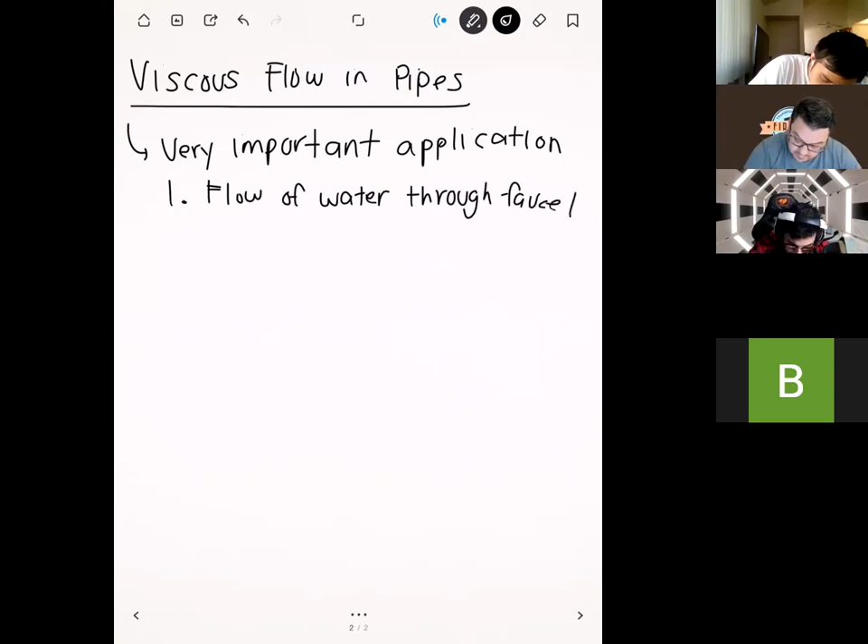That's where pipes are going to be. HVAC, so your heating and air conditioning and ventilation, they all use pipes, but that's for air, not water. If you work with, like I think at the beginning of the class we talked about, the Alaskan oil pipeline, so big pipelines like that, those are big pipes too.

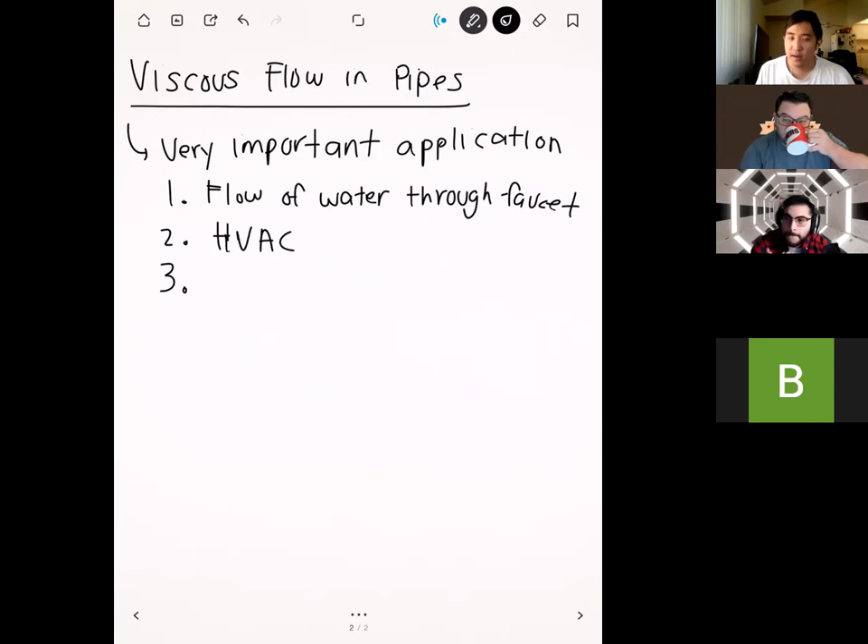There's even biological examples, like just flow in your body. Your blood vessel is basically like a pipe, right? And a lot of these materials can be applied to that as well. And other things, like your motor oil in your engine, those travel through pipes, and many more. So the examples of pipe flows in engineering are very numerous and way too many to list in a class like this.

HVAC stands for heating, ventilation, and air conditioning. So basically, the airflow in buildings.

In this unit, we're basically going to be combining two things. We're going to combine what I call analytical methods, which are solving equations for certain quantities based on first principles — we'll see Bernoulli come back. Bernoulli is probably the MVP of this fluids class, so we use him quite a lot, and this is no exception. And we're also going to make use of empirical data, so this is going to involve dimensional analysis as well. So it's combining those two things, and we'll see how they combine to help us analyze these problems.

Question: do we consider air as a viscous fluid? Yeah, actually we do. Air has very low viscosity, but with pipe flow, the diameters of these pipes are very small relative to things like airflow over an airplane, which is a vast open space — there viscosity plays very little effect. But in very small confined spaces, like inside a pipe, even the smallest viscosity is still going to have an effect, just because the spaces are so confined. So in this case, we do consider air as a viscous fluid. Great question.

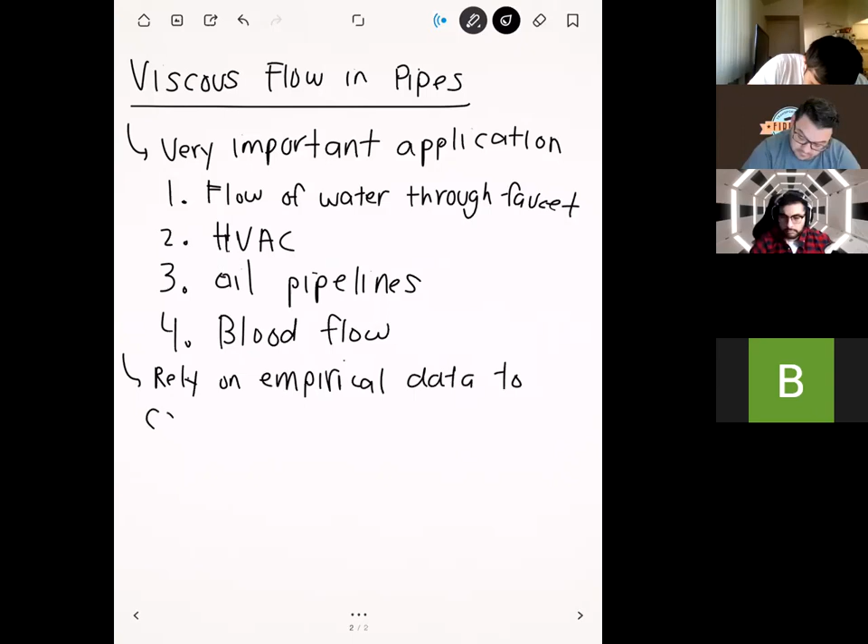We're talking in detail this week about turbulence, which is an important phenomenon in all of fluid mechanics, but it plays a really big role in pipe flow as well.

Just to give you a preview of where we're going, we're going to be looking at systems that look like this. Let's say we have an inlet pipe. Let's say we have an elbow here to change the direction. We have another pipe here. Let's say we have a pump, and that pump is going to add energy. Let's say we have another kind of housing here, and another thing that's going to split the flow — so we have a T intersection. And we have a curved X section of pipe. And let's say we have a valve.

I'll define all these things later as we get to them, but just to give you a preview of where we're going — this might be a simple system. So here you have straight sections of pipe, here you have an elbow, this is a pump, this is a T-split, and then this is a valve, okay?

We'll be looking at specific piping configurations like this and seeing how they affect the flow, and how we can actually do calculations with these. Are there any questions on this before we move on?

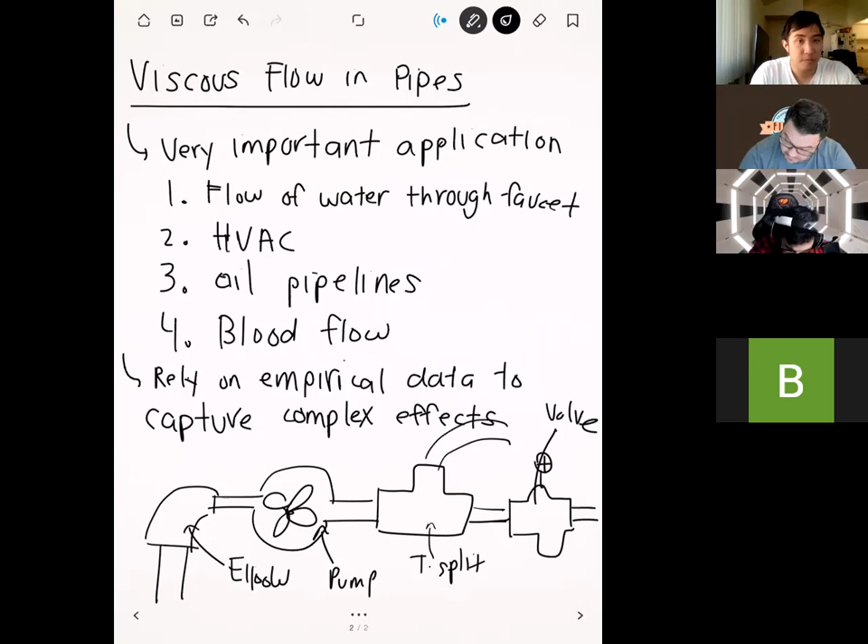Okay, so the first thing we're going to talk about is the difference between laminar and turbulent flow. Everyone's probably heard the term turbulence before. If you've ridden in an airplane, you're familiar with turbulent flow - it's like a theme park ride, the plane starts to shake. What that refers to is that the air currents around the airplane are really chaotic, and they kind of buffet the airplane and make it rock. Turbulence isn't just unique to airflow.

We can use turbulence to describe general fluid flows and how they behave. These terms, laminar and turbulence, really describe how orderly, or how well behaved, the fluid moves. Generally what we see is that as the velocity of the fluid increases, the flow patterns become more chaotic.

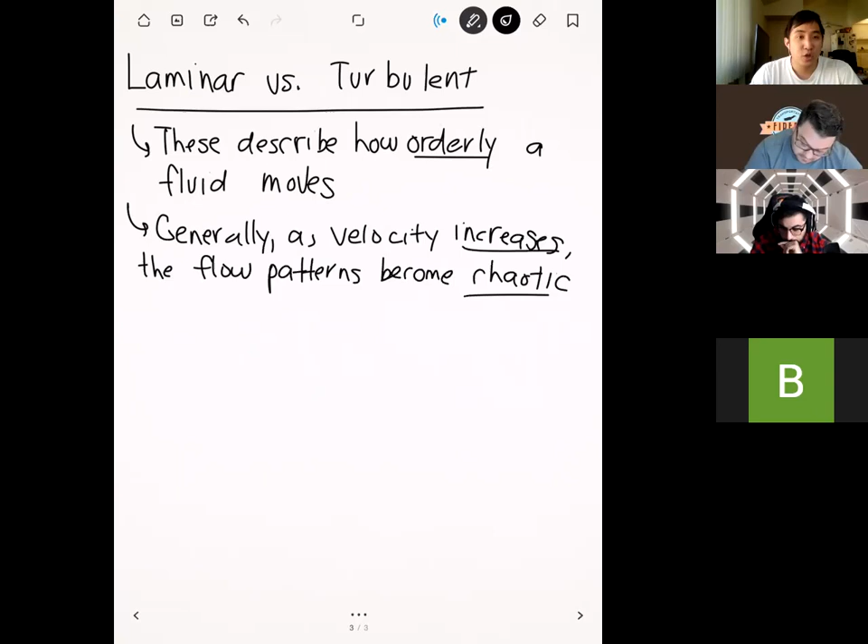So I don't talk about history all that much because I don't think it's that important in the grand scheme of things, but this is an important one. This idea of turbulence was first observed by a guy named Osborne Reynolds. You've heard Reynolds before - his name is attached to a lot of things in fluid mechanics, because he did a lot. The experiment that he did was that he had a pipe.

In the middle of the pipe, he had a little injector, and from this injector he was releasing some food coloring or dye.

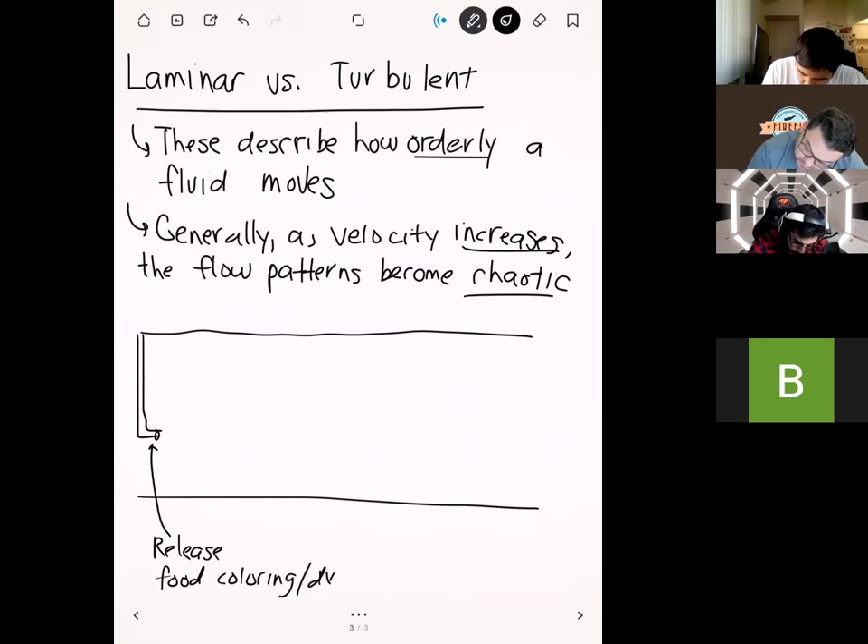In this pipe, we have flow that goes in this direction, so the flow is basically carrying that dye downstream. He observed that depending on how quickly he moved the flow, or how fast the flow was, he observed different patterns for the dye.

Let's go over the case for low velocity first - I'll have low velocity in red. When he used low velocity, what he found was that the dye kind of stayed in just a single line, just like that.

At low velocities, the dye didn't really go out and explore all that much. It basically just stayed within the same line as which it came out from the injector. If you look at pictures from the experiment, you had a very nice orderly line - it was bold because the dye was all concentrated into that single line.

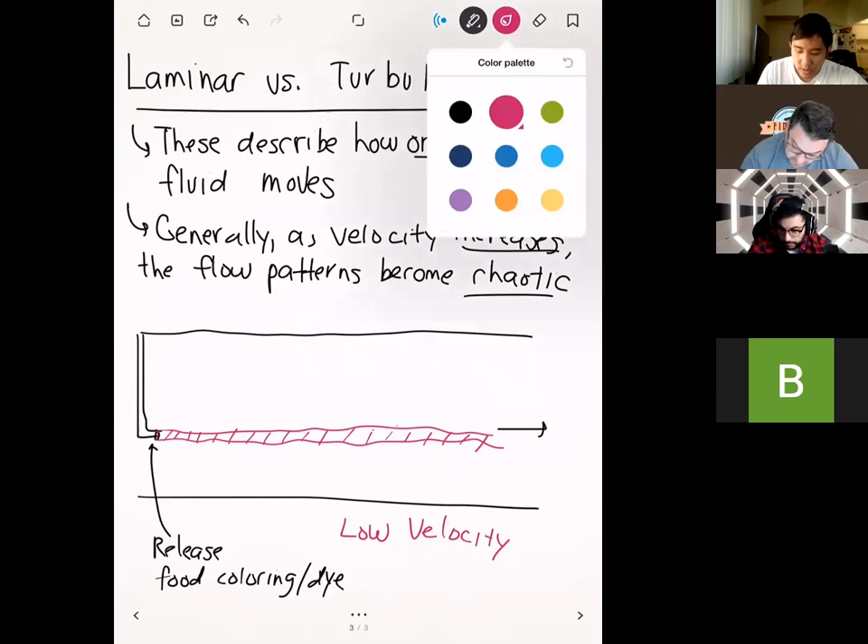But then as he ran his experiment and increased his velocity, let's say now he's under medium velocity - what he expected was that he would still see this dye streak, but it would just move faster down the pipe. But he noticed something he didn't really expect. As he increased the velocity, not only did the dye streak move faster down the pipe, it also started to spread out to the other areas of the pipe too.

So it started to look like this. Compared to the original dye streak, this one was spread out throughout the pipe - it was no longer just staying in this very narrow column, it was starting to spread out to the confines of the whole pipe.

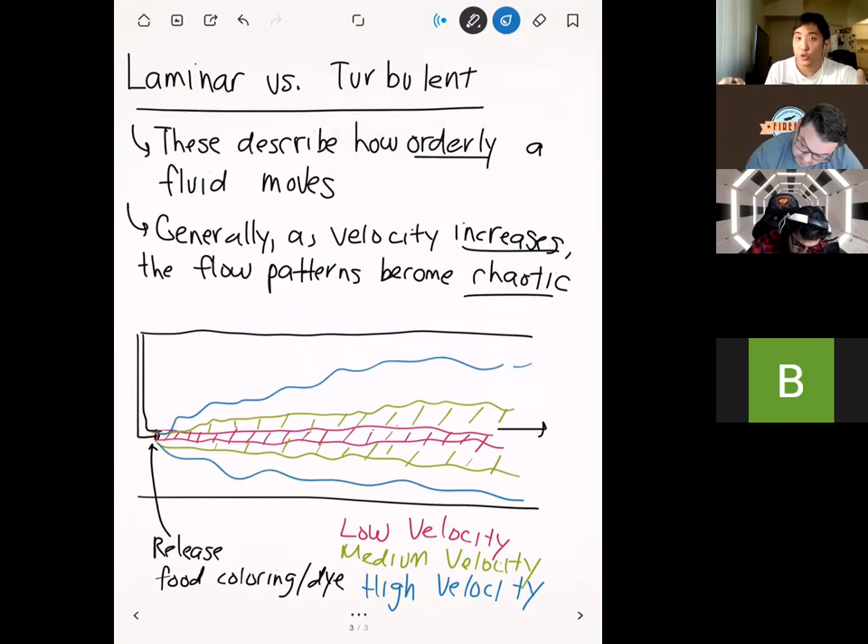And then as he increased this velocity even more - let's say he increased it to something that's high - this spreading got even more pronounced. So then we got something that looks like this, where the dye started to diffuse across the entire pipe.

This was very strange to him because the flow that he was putting in was only one direction - he was just putting flow from the left side to the right, and the flow field should look perfectly horizontal. So if that's the case, why was he getting this kind of spreading? The spreading was due to this phenomenon that he just observed, known as turbulence, okay?

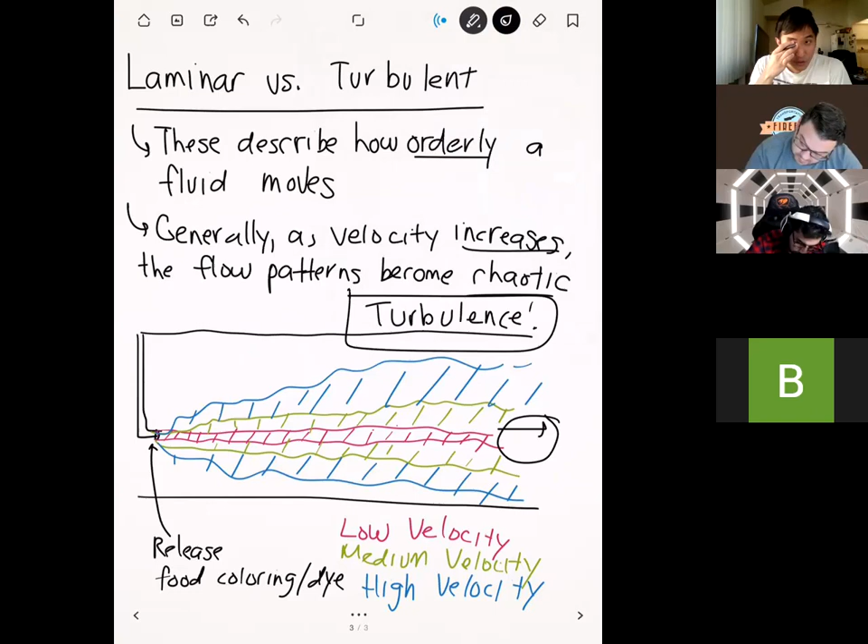All right, I'll draw another picture to illustrate turbulence on the next page. But before we do that, are there any questions on this?

Okay. Right, so from this experiment, he was able to come up with two different ways to describe a fluid motion.

So let me draw two pipes here. In the first case, which we called laminar, the flow patterns are very orderly. They stick to a very orderly pattern.

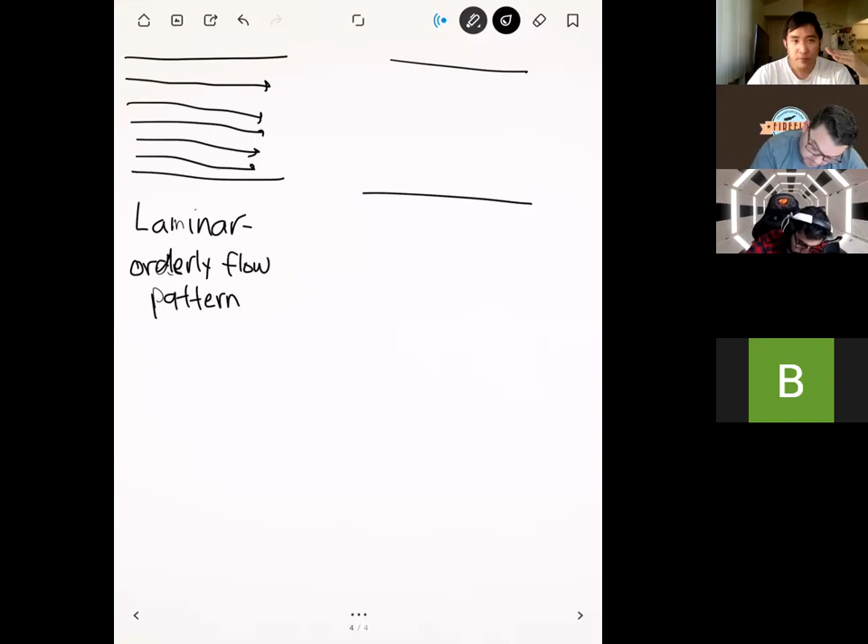As an example of this, let's say we draw the streamlines and they look just like this. They all kind of follow the same path, and they're just like nice little soldiers in a row, okay?

On the other hand, as he increased the velocity, what he started to notice was turbulence. And turbulence, for lack of a better term—to be real with you guys right now, we still don't really understand turbulence all that much, despite many years of research. We characterize turbulence as just kind of chaotic flow.

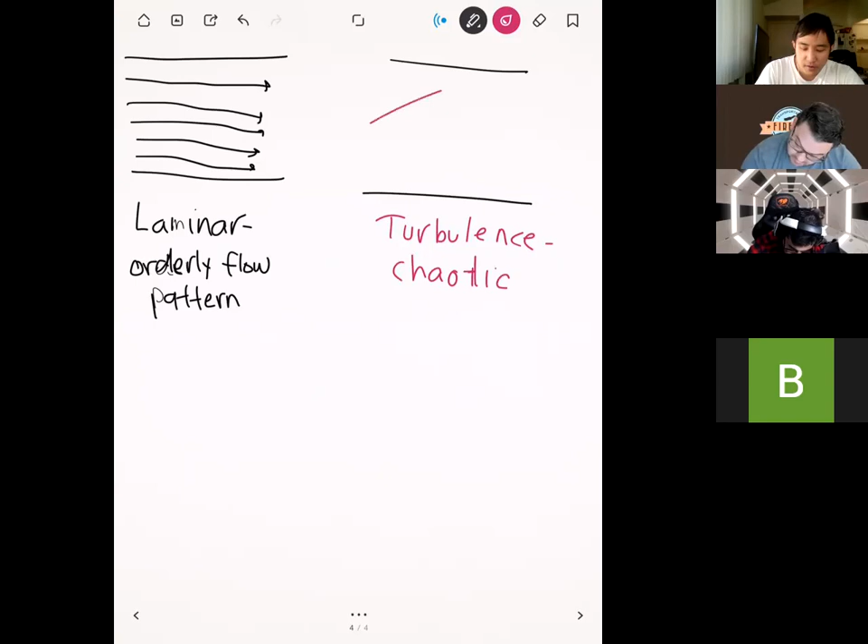So the flow, instead of having nice orderly streamlines like we have on the left, literally just looks like your 3-year-old cousin started scribbling onto the paper, right? And that's not that much of an exaggeration. So chaotic turbulent flow is really chaotic like that.

You can see here that we have flow streamlines that not just go in a straight line, but travel to other parts of the pipe, which is how he was able to observe the spreading of the dye column. Yeah, chicken scratch, like your doctor's signature.

Okay, so now the question is, how do we determine if we have laminar or turbulent flow? Yes, we can kind of look at the flow like this, but what Reynolds wanted to do was, without having to run a fancy experiment like he ran, find a way to determine whether a flow was laminar or turbulent.

And so he was able to come up with a way, and we actually saw this last week. The way that he determined whether a flow is laminar or turbulent was he came up with this number, which he named after himself, called the Reynolds number.

So let me define all the quantities here. This rho right here is density. This V is velocity. D, in this case—we'll see Reynolds number come up in other applications—D can be any length, so we often call D the characteristic length of the flow. It's just any kind of length scale that characterizes it. But for this experiment, D is going to be the diameter of the pipe.

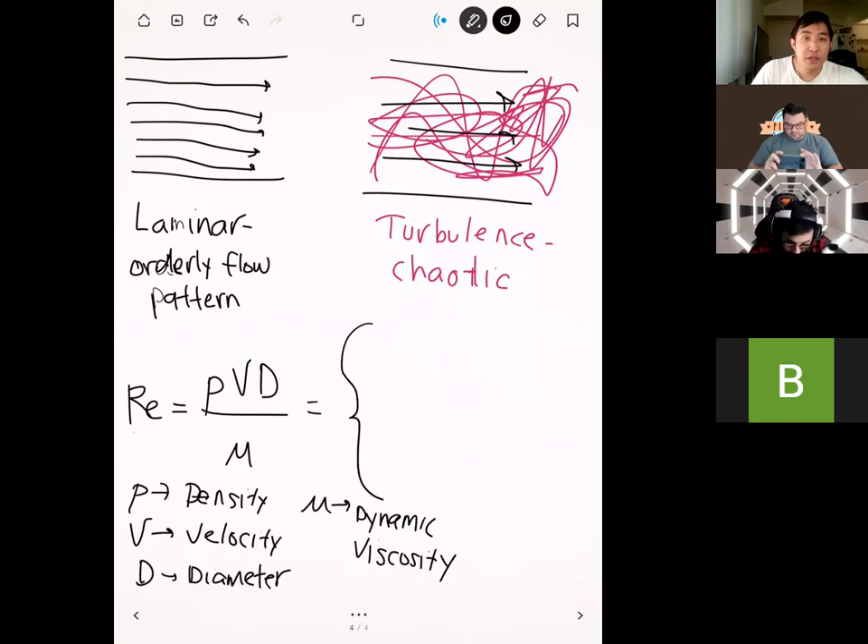Okay, and so what Reynolds found was that if you compute this Reynolds number, and your Reynolds number was less than 2100, then this gives you laminar flow.

If you compute your Reynolds number and it's above 4000, this gives you turbulent flow. If you're in between, this is known as transitional flow. Transitional flow is like medium chaos, I guess you can say. It's not as chaotic as turbulence, but more chaotic than laminar. There's a more precise definition, but it's hard to get into without diving into turbulence, which I don't want to do, because it's a rabbit hole that goes really deep.

So is it that 2100 is less than Re is less than 4000? Yeah, so if the Reynolds number is between 2100 and 4000. Remember what the Reynolds number represents.

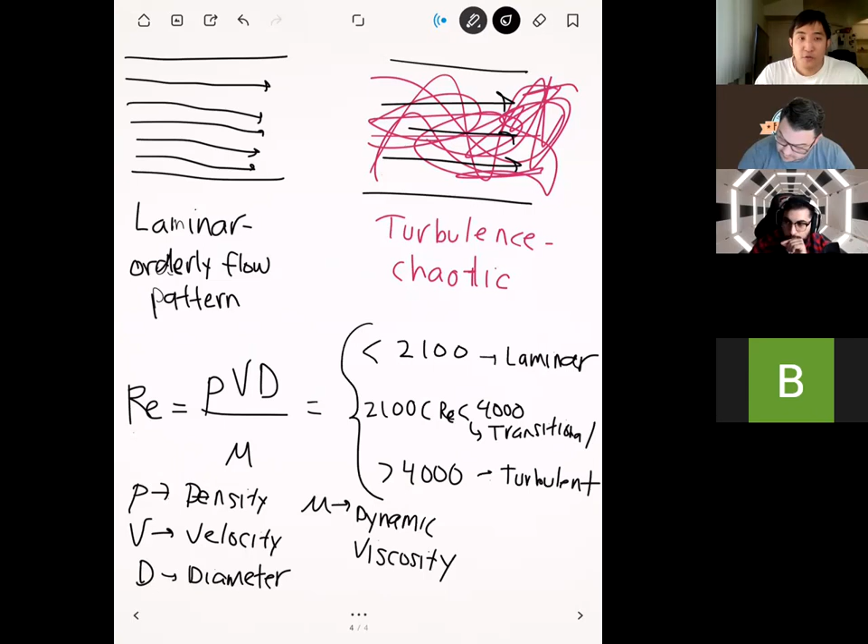The Reynolds number was one of our dimensionless numbers that we talked about last week, and it's a ratio of inertia on top and viscous forces on the bottom. So for a fluid flow, as the inertia forces start to dominate, as the velocity goes up, or say you have a heavier fluid, a higher density, or a higher length, as inertia starts to dominate, then you start to get more and more chaotic flow.

Generally the way Reynolds number goes up is the velocity goes up, because usually the density for a fluid is relatively fixed. So the only way you can change the inertia is by increasing the velocity. As the flow gets faster and faster, the Reynolds number gets higher and higher, and you get more and more turbulent.

One other note I want to make is that we'll see Reynolds number after the Thanksgiving break too, but under a different context. Depending on the context, these thresholds are going to be different depending on the situation. These thresholds of 2100 and 4000 are specific to just pipe flow, because that's the subject for this week. But when we go over boundary layers and external flow after Thanksgiving, these thresholds are going to be different.

So I want you guys to keep that in mind. After Thanksgiving, when I say the Reynolds number has to be greater than 10 to the 5th to be turbulent, I want you to think it's because they're in different situations. These numbers were very much experimentally determined, so they're pretty arbitrary. The reason is because these were just measured from experiments, not really from first principles. Any questions on this?

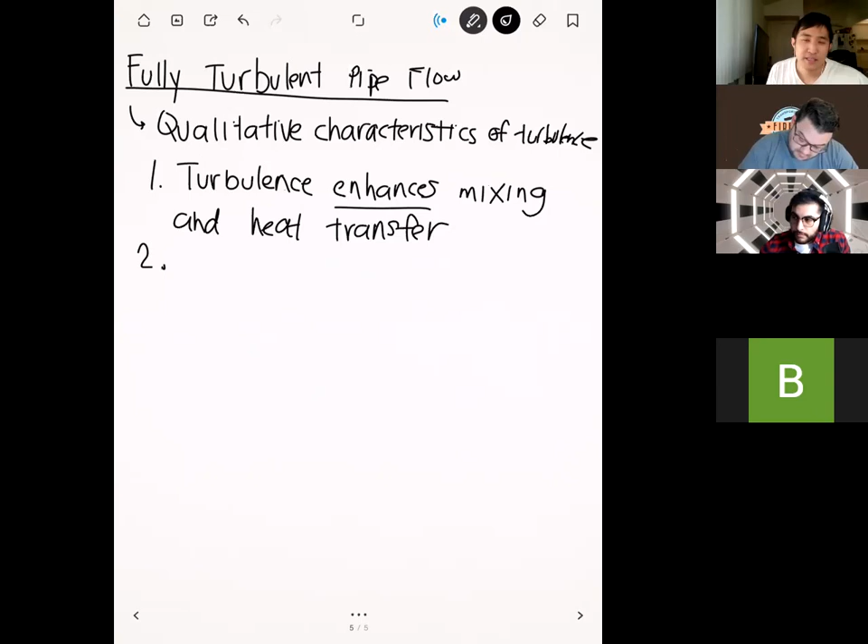The other thing turbulence helps with — or I guess this is a bad thing — is that turbulence will also increase the pressure drop along the pipe.

Relative to laminar flow. Remember, we talked about pressure drop as a way to characterize how much energy or force is needed to drive a flow. So if you have turbulent flow, it's generally going to be more inefficient in terms of energy — it takes more energy per fluid to drive turbulent flow.

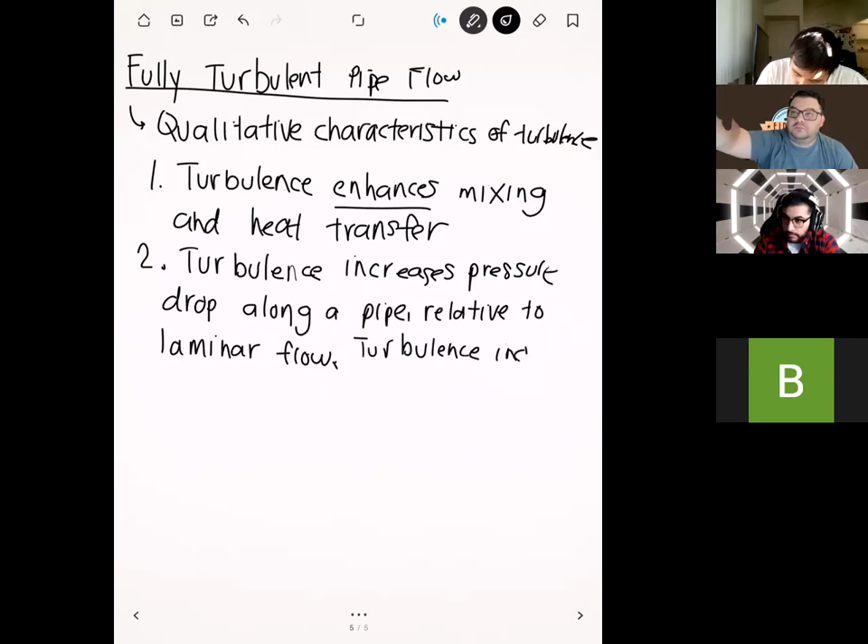Another thing to mention is that when you compare turbulent flow and laminar flow, turbulence increases the drag on a solid body. It increases a very specific kind of drag called friction drag, or viscous drag.

We'll talk about this more after Thanksgiving, but I wanted to mention it now. So turbulence, even though we don't fully understand it yet, we do know some of its effects on certain things, at least from an engineering point of view.

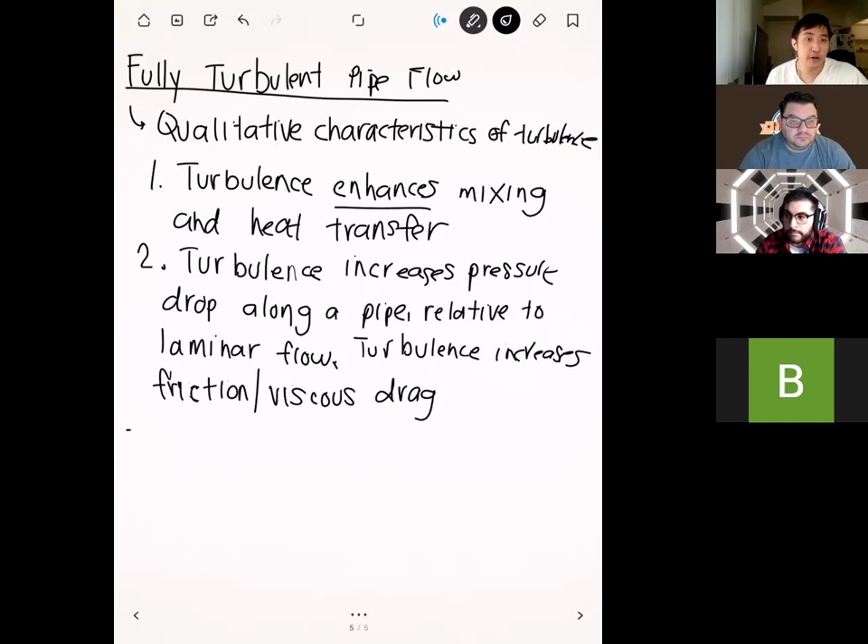With those in mind, we can start to use this in some kind of analysis. Before we begin, I want to bring back Bernoulli for probably the fourth time in this class, but it's really useful. I'm going to put Bernoulli in a different form — I don't think we cover this explicitly, although some of you have seen it in the notes, but it's going to be more useful for our calculations here. This is the Bernoulli equation in head form.

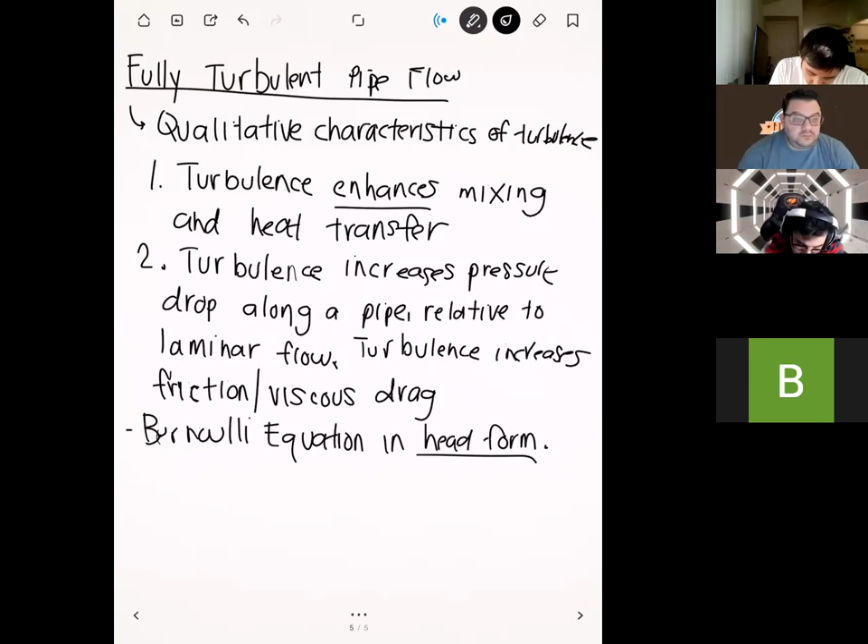What's unique about this form is that we've manipulated the equation so that every term here has units of energy per weight — basically every term will have units like joules per Newton, something like that.

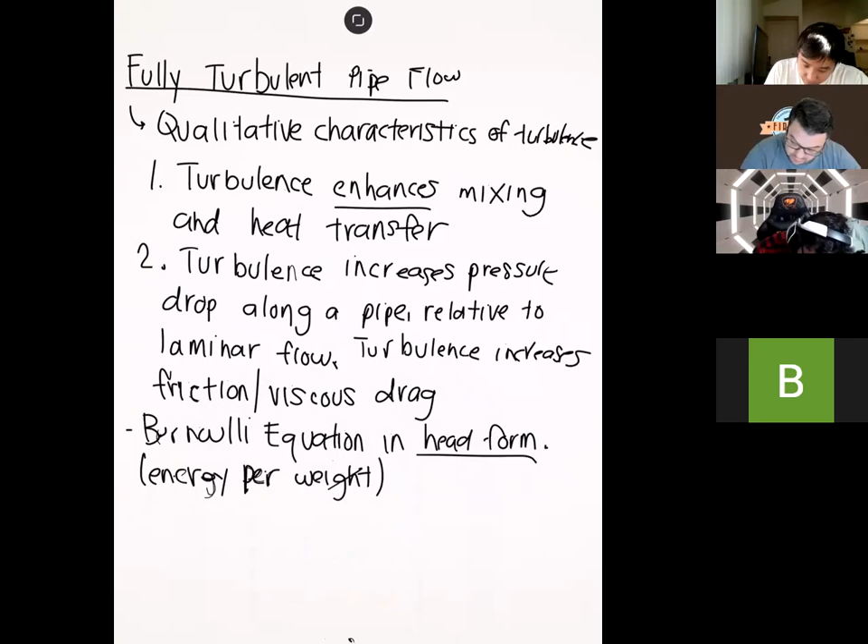So our Bernoulli equation looks something like this: P out over gamma, where gamma is specific weight, so that's density times gravity. To that we add V out squared over 2g, which is our kinetic energy term.

Next, we have our height term. That's just Z out. Of course, that has dimensions of length, but length also has the same dimensions as energy per weight. So they end up having the same dimensions, but they have kind of different interpretations.

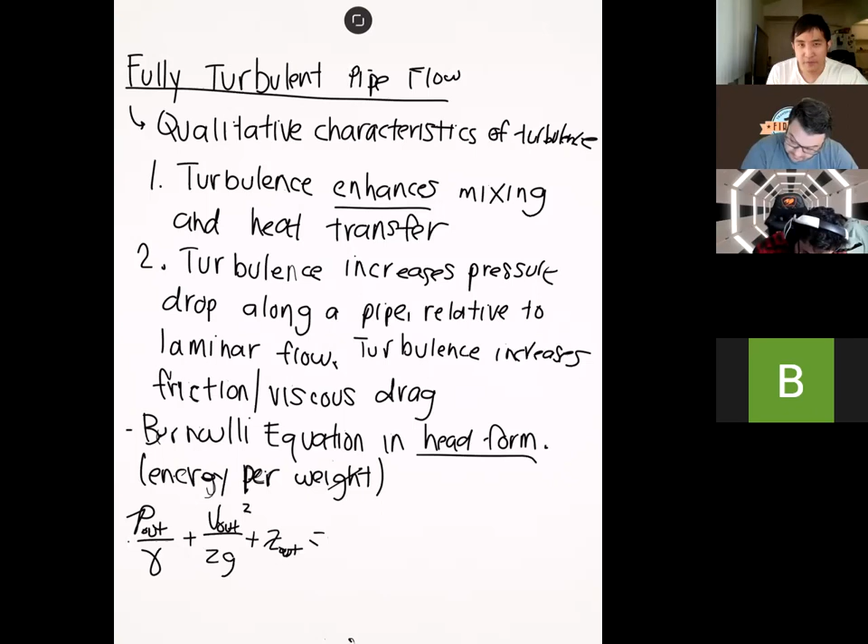This is going to be equal to the same quantities at the inlet. So you have P in, pressure in, divided by gamma, plus V in squared divided by 2g, plus Z in. Those are the standard Bernoulli terms.

But since we're talking about energy here, we have to also include terms for shaft work and also for losses. I'm going to give the shaft work the term H sub S, and then the losses, I'm going to give the term H sub L. So this right here is shaft work, and this right here is head losses.

Remember, shaft work is if you have a pump or a turbine in your flow, where you have a device specifically designed to either insert energy or take away energy from the flow. And then HL is your losses, energy losses due to dissipation or viscosity. The focus for this unit in pipe flow is actually going to be this guy right here and how we actually quantify this. Previously when we saw this for conservation of energy, I kind of just gave you the losses, but now we'll actually have ways to compute this using some experimental data that people have done in the past.

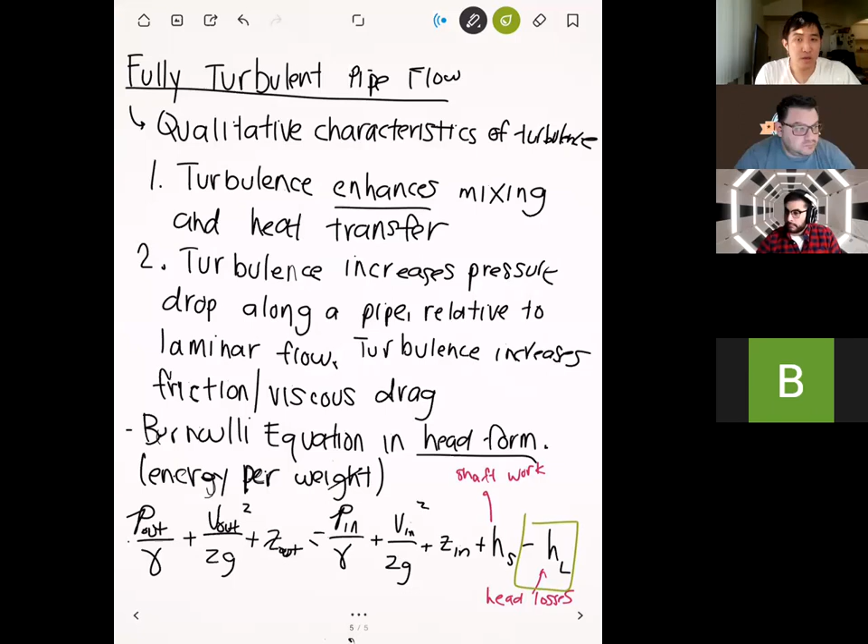Let's talk about these head losses a bit more. Remember, these head losses represent a viscous energy loss in pipe flow. As the fluid flows through the pipe, it's going to be rubbing against the sides of the pipe, right? And so just like when you rub your hands together and you have heat loss from friction, as the fluid rubs against the sides of the pipe, it's going to incur some energy losses.

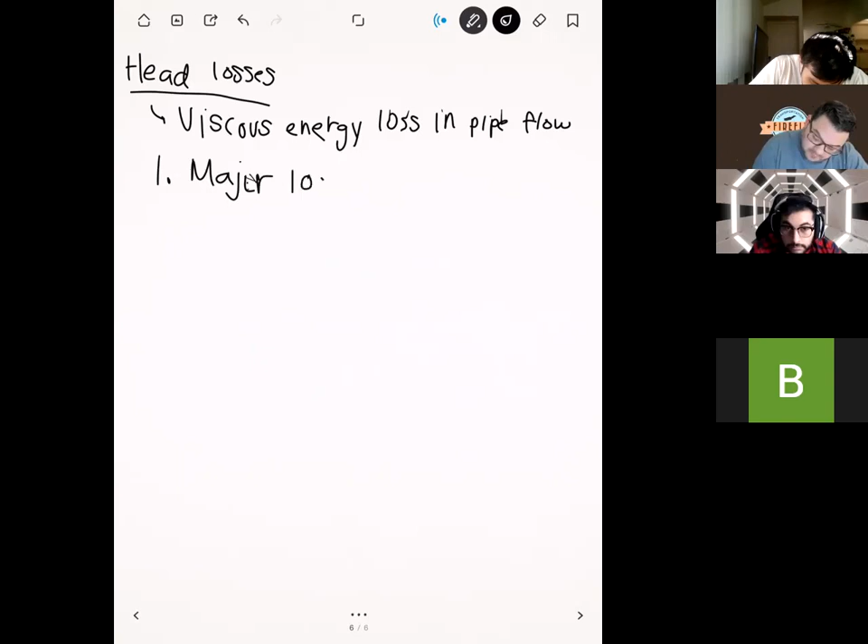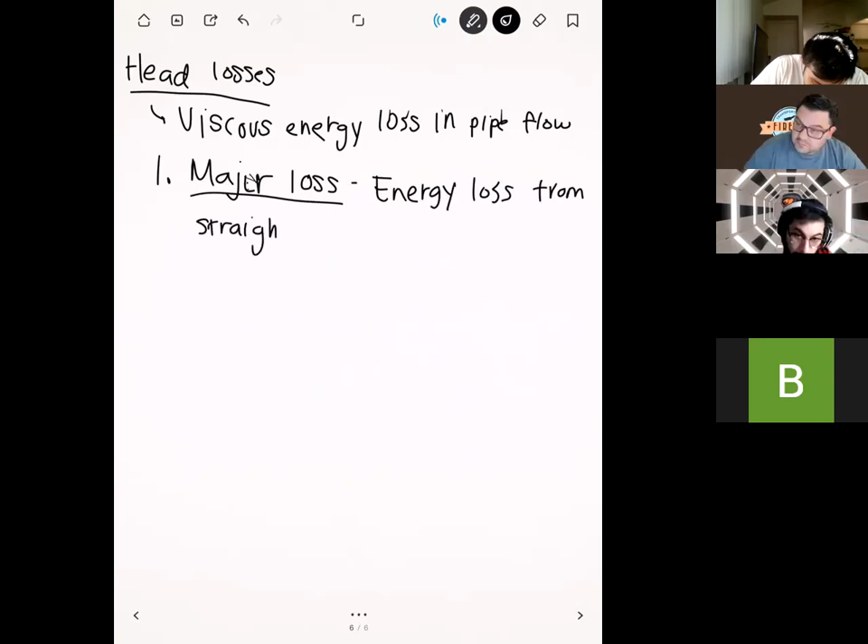There are two categories of losses that I want to talk about. The first one is called major losses. Major losses are defined as energy loss as the flow goes through straight segments of pipe. Just by going through a straight section of pipe, you're going to have some energy losses there.

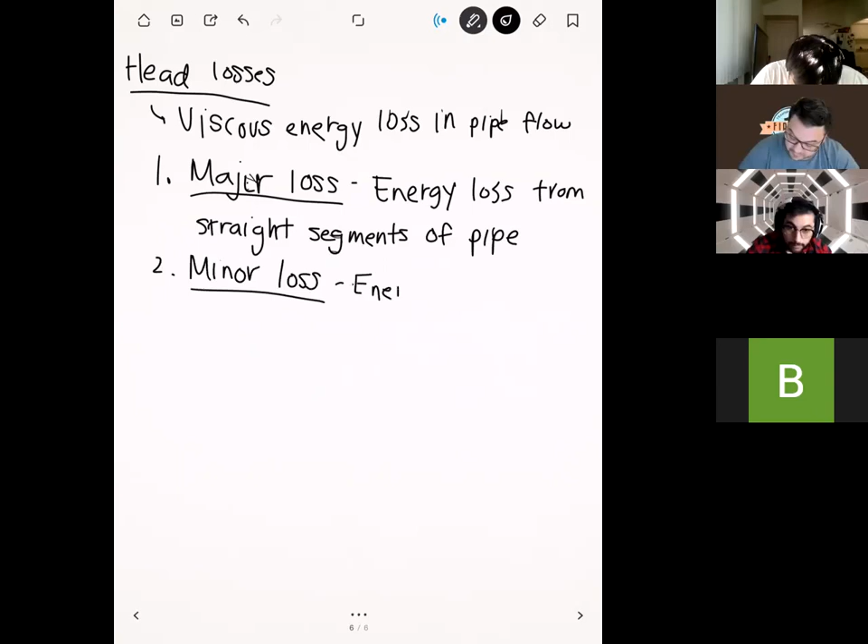The other thing we'll talk about is minor losses. Minor loss is any energy loss that goes through basically everything else. Remember from the figure at the beginning, we had things like bends, L bends, T intersections, valves, flow splitters, pumps, and stuff like that. So basically everything else will be characterized as minor losses.

Once you compute the major and the minor losses, the total head loss is just going to be the sum of these two.

What we're going to do next is learn how to actually compute these two kinds of losses. We'll cover major losses today, and if we have time, we'll go over minor losses later. One thing I want to talk about before we begin is that this naming convention is terrible—probably one of the worst in fluids—because when you think of major and minor, you think major losses are going to be bigger, right? That's not the case at all.

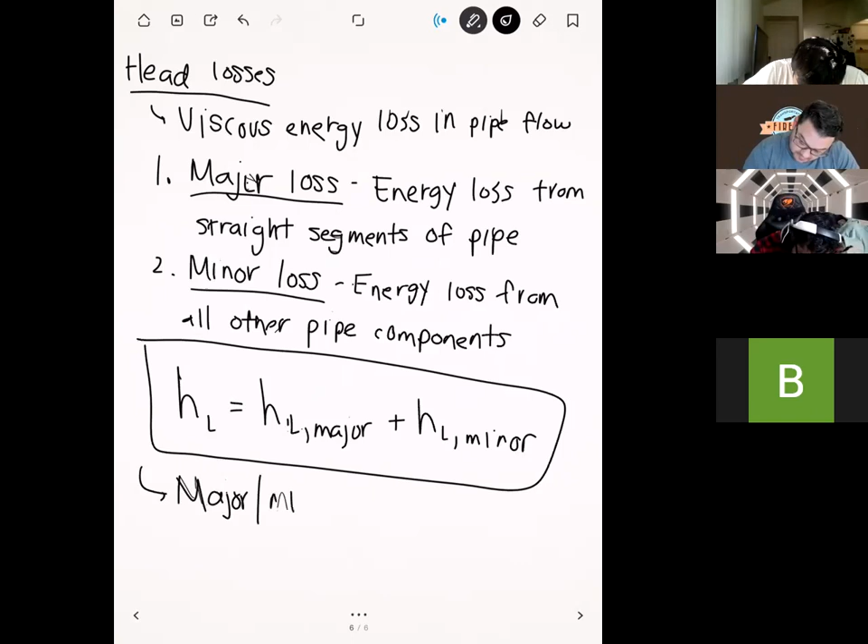The major and minor here have nothing to do with their relative magnitudes. We're going to see situations where your major loss is actually extremely small, but your minor losses are really big. This happens a lot in practice—even though we call them major losses, there's usually not that much energy loss there compared to the minor losses. So if you're doing homework problems and get a minor loss that's like 5 times higher than a major loss, don't panic, that's what it's like a lot of the time. It's even more terrible because it's not even named after the person who invented this—just that whoever named it was kind of a bonehead and chose the worst naming convention, one that's going to confuse fluid mechanics people for the rest of their lives.

Any questions on this before we start going into major losses?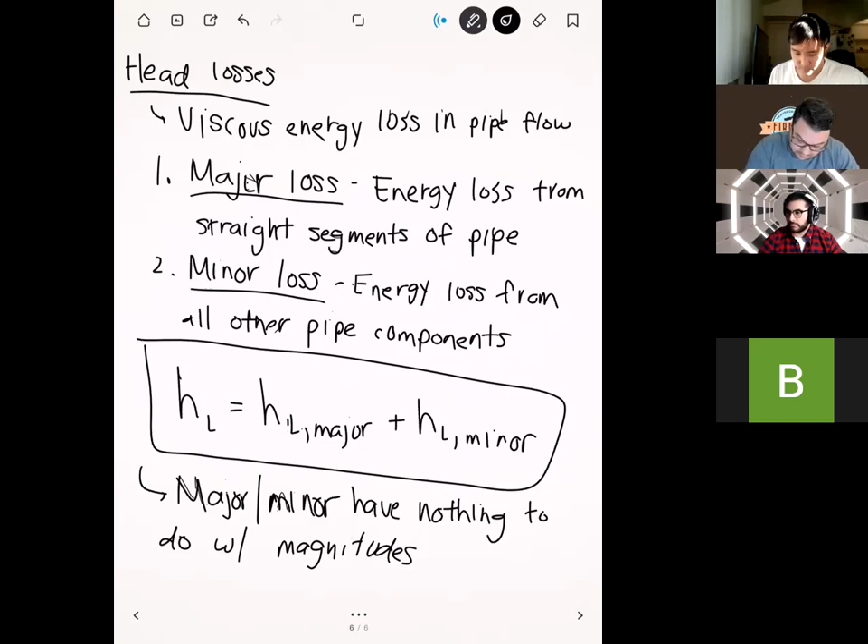Okay, let's talk major losses first. Just like was mentioned before, the major loss has to do with energy loss associated with straight segments of pipe. The way that we characterize this energy loss is as a pressure drop. Essentially, because of these major losses, we're going to have a drop in pressure as we flow through a pipe.

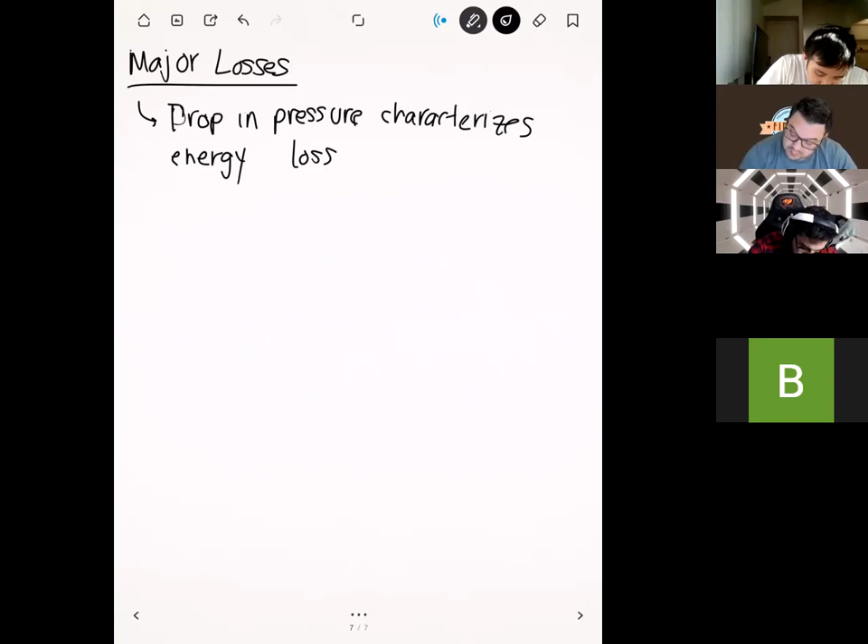Characterizing this pressure drop is actually pretty complicated, especially when you have turbulent flow. But we can come at this from a dimensional analysis standpoint. From dimensional analysis, what we found is that the pressure drop, or delta P, is equal to a function of the following parameters.

So it's a lot. We can say that the pressure drop is basically going to be a function of the velocity v, the diameter d of the pipe, the length of the pipe, so depending on how long your pipe is, and at the end here we have mu and rho, which are viscosity and density. And so we have a new guy joining the party: this represents the surface roughness.

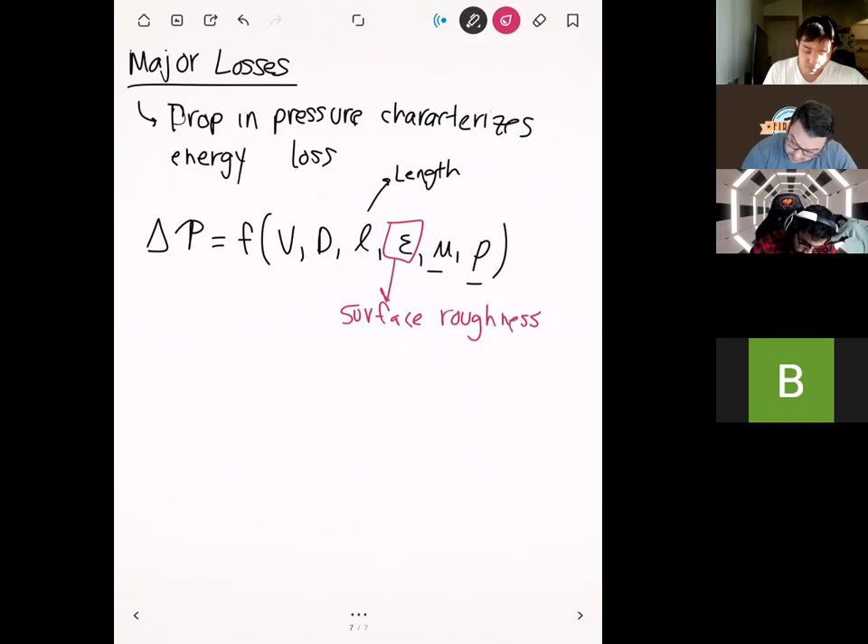What that represents is the fact that when you have flow in a pipe like this, the pipe is not going to be perfectly smooth. So you're going to have a little roughness on the surface. That's almost always going to be there, because it's almost impossible to eliminate this roughness. You have to use very precise machining methods to at least minimize this.

The way that this roughness is characterized is as the height of these kind of imperfections. So this epsilon here has units of length. In other words, it's the height of the roughness.

If you're curious about what typical surface roughness values are for a pipe, this is tabulated in table 8.1 in the book. In table 8.1, depending on what type of material your pipe is, they'll give you kind of typical values for these surface roughness. But again, this is something you can also look up on online databases, or a lot of times if you buy a pipe, it might be in the specs for that pipe as well. So this is an important thing to know.

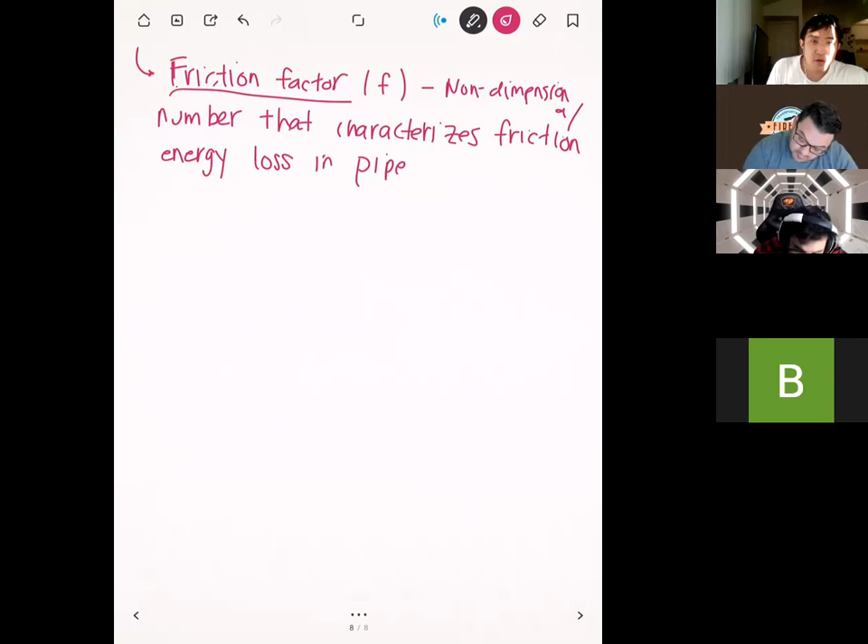Once you have the friction factor, you can use it directly to compute the major losses. This is the important formula here. Your HL major is going to be F, the friction factor, multiplied by the ratio of the length of the pipe over the diameter, and then multiplied by a kinetic energy term.

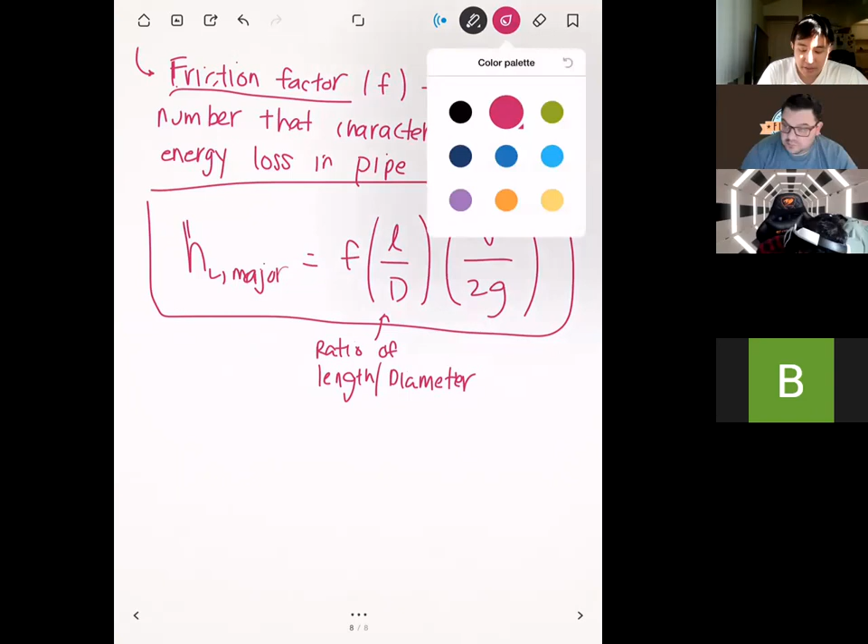Remember, V here represents the velocity, and G is just gravity. Once we have all these together, we can compute the actual head losses associated with the major losses. Most of these things you can get easily for a problem—a lot of times you know the length of the pipe, the diameter, the velocity, and gravity, of course. So the only question is, how do we determine this friction factor?

The friction factor—this is what someone did back then, they ran basically a ton of experiments and computed this. And so the way that we're going to look up this friction factor is we're going to look it up from a chart.

In particular, the chart is called the Moody chart. It's not a Harry Potter reference—the guy was actually named Moody.

If you want to look up the Moody chart in your book, which I highly recommend, don't use the one in the notes because it's drawn poorly. This is figure 8.20 in the book. But the Moody chart is famous, so you can just Google it and you'll come up with probably a much better version as well.

On the next page, I'm going to draw a poor representation of the Moody chart, just so you know what you're looking for. Again, don't use the one from the notes because it's not that precise—use the one that's either online or in your textbook. Before we do that, are there any questions on this?

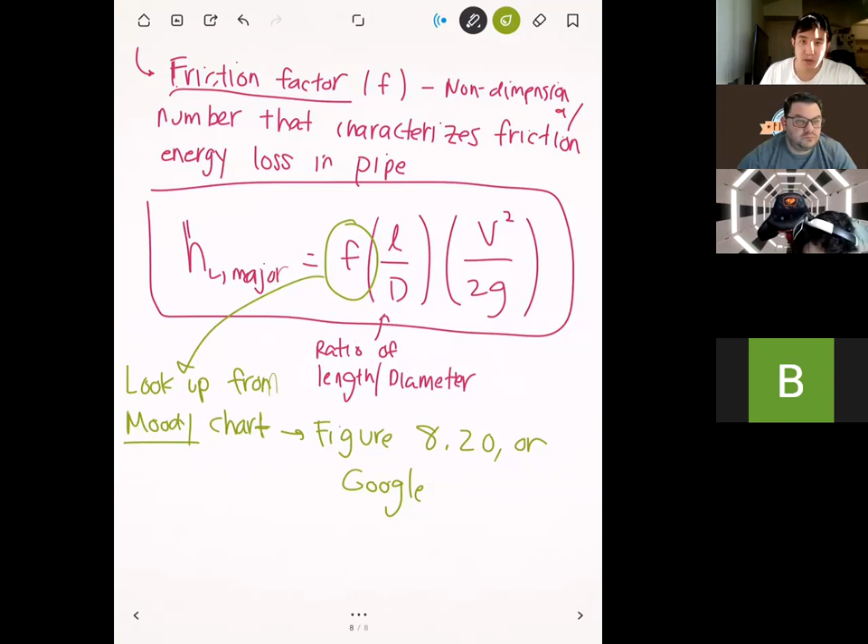Let's draw at least an approximation of the Moody chart. So the Moody chart looks like this: on the y-axis on the left, we have the friction factor—that's how you're going to look up your F.

On the x-axis here, we have Reynolds number, and it's given to you in a log scale, in orders of 10. So we have 10 to the third, 10 to the fourth, 10 to the fifth, 10 to the sixth, 10 to the seventh—it even goes up to 10 to the 8th. So Reynolds number can get really high.

And on the right here, we're going to have the ratio of epsilon over d. Remember, epsilon represents the surface roughness of your pipe.

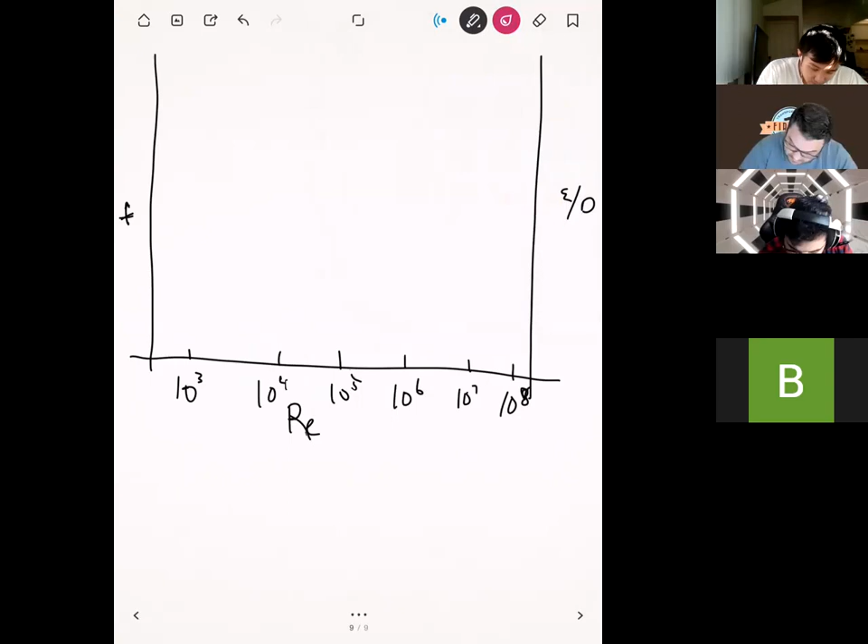From this, you should see a bunch of lines that kind of go like this. Next to each of these, you should see a number—this one might be 0.05, this one 0.02, this one 0.01, this one probably 0.001, this one 0.0005, this one 0.0001. I'll let you know what those numbers mean in a second.

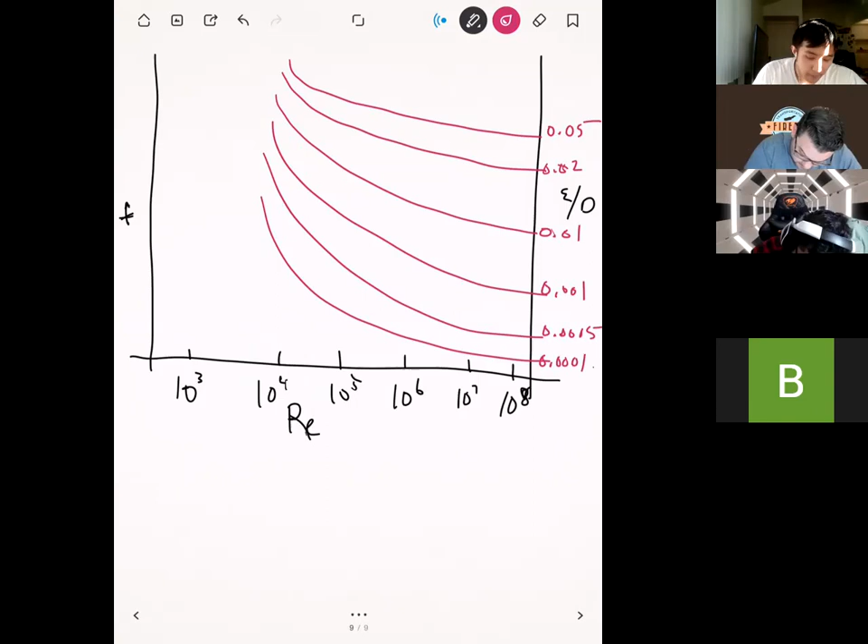And on the left-hand side right here, we have a nice line like this. All right, so there's a lot going on with the Moody chart, so let's take it apart step by step.

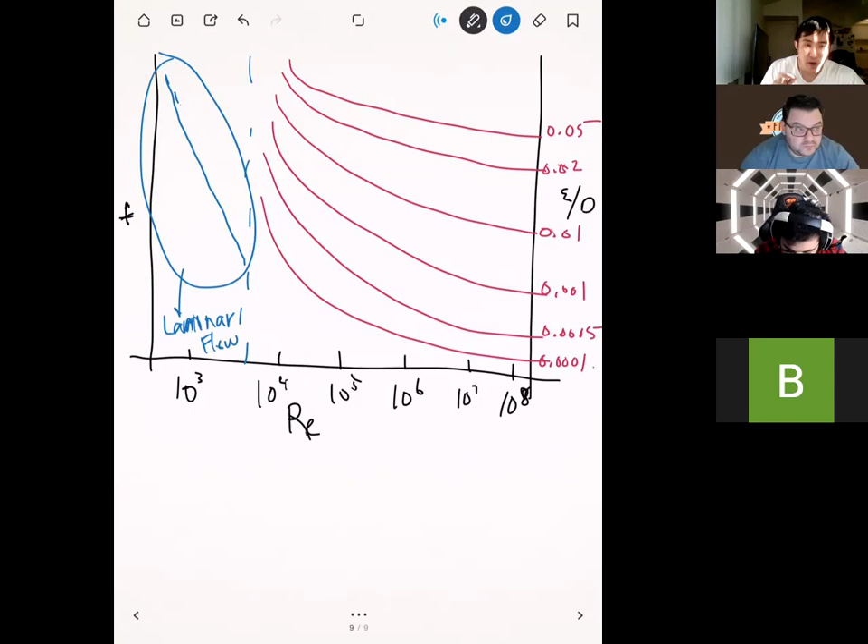First thing I want to talk about is the separation between these two: on one side you have the straight diagonal line going down. On the left, in blue, that's where our Reynolds number is really low—this is for laminar flow, so if your flow is laminar, you follow that curve. On the right, this is for turbulent flow. So you can see the separation between them based on their Reynolds number.

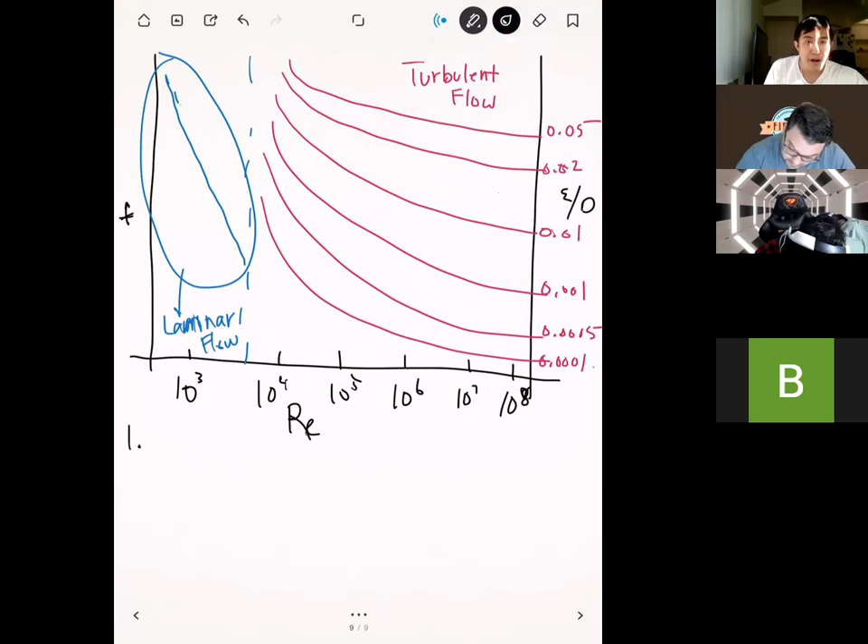So let's talk about how we actually use this. The first thing to compute is the Reynolds number.

Okay, so once you compute the Reynolds number, you know where you're going to be horizontally on the chart. Based on your Reynolds number, you're going to pick out a place, and that's going to tell you whether you're going to be laminar or turbulent.

So the second step is that if you're turbulent, you need to compute this ratio of epsilon over d. This epsilon over d is the ratio of the surface roughness over the diameter.

Based on that computed value of epsilon over d, you're going to pick one of these curves here on the right. So let's say that you computed an epsilon over d, and that's equal to 0.01. In that case, you're going to follow this graph right here.

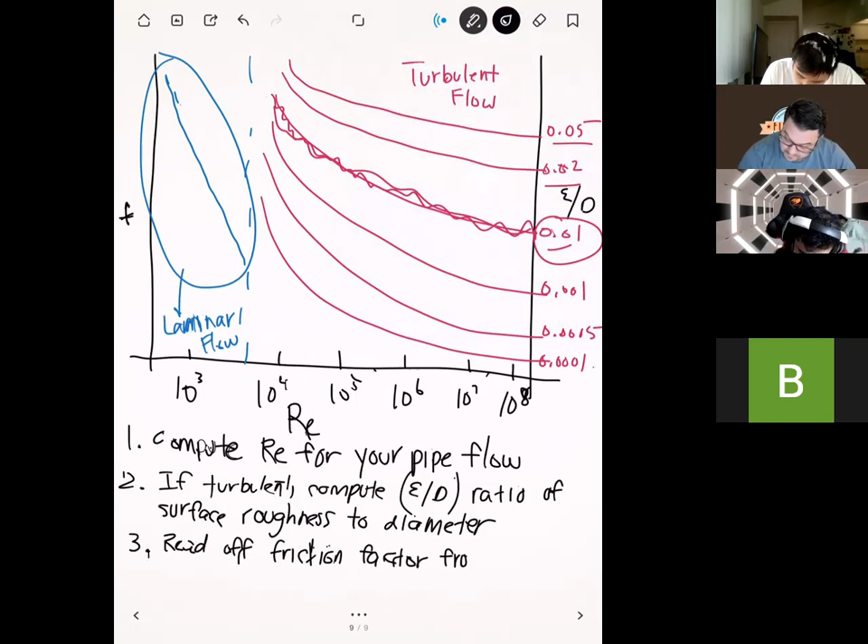So let's say that we had a Reynolds number of 10 to the 6. We're going to follow up the 10 to the 6 up to the curve that we want. This location right here is going to be associated with the friction factor over there. So whatever we read off the graph, that's going to be the friction factor we use for our problem.

So the question in the chat is, is D still our characteristic length, or is this purely for pipe? So this is purely for pipe. The D is always going to be the diameter of your pipe. Good question.

Are there any questions on this?

So if you have turbulent flow, you're going to use the Moody chart for your problems. I made that kind of section on the left there for laminar flow, but there's actually an easier way to compute the friction factor for laminar flow.

The question in the chat is, how did I know to use 10 to the 6? That was just an example. We'll do an example where we'll actually compute the Reynolds number, and that'll tell us where to be on the chart. But that's going to be whatever Reynolds number you compute for your problem.

Okay. So for laminar flow, remember this happens when your Reynolds number is less than 2100, or for special cases, which we'll do an example in a second.

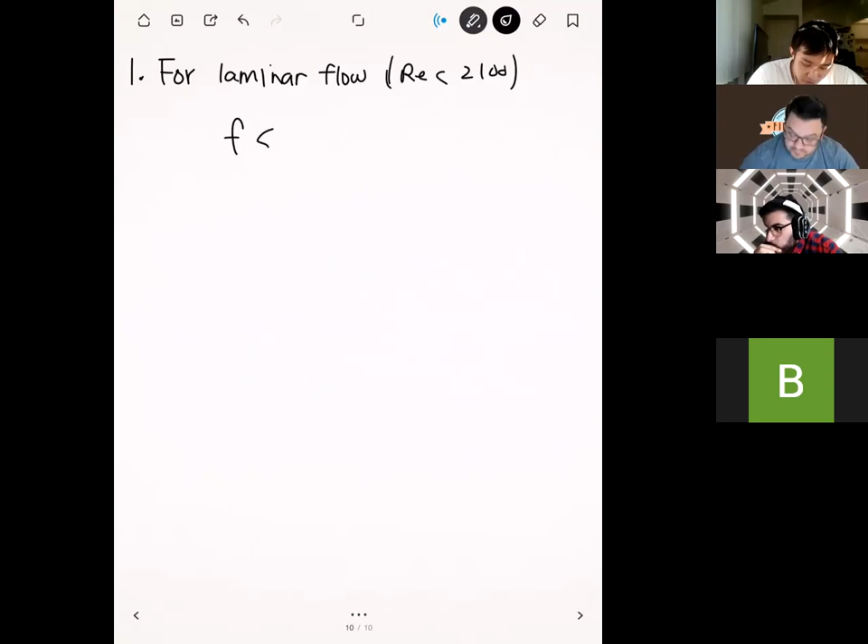So if you have laminar flow, there's actually an easy formula for the friction factor. That's going to be 64 divided by Reynolds. So once you have your Reynolds number, you don't even have to bother with the Moody chart. If you have laminar flow, you just plug it into this formula right here. And that's only for laminar.

So if your Reynolds number is above 2100, or if you can assume that the flow is turbulent, you're going to have to use the Moody chart for that. And number two, even despite the Reynolds number, sometimes it's possible to induce turbulence.

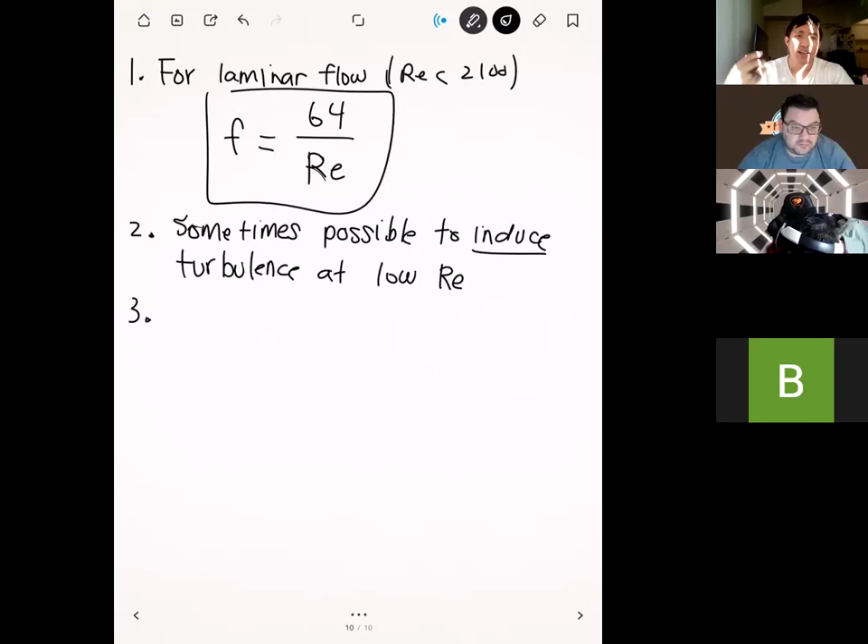Because normally you don't get turbulence until your Reynolds number passes a certain threshold. But sometimes you want to get some turbulent effects without having to increase the velocity. So there are some things you can do, like you can put a tripwire in the flow to kind of create that chaotic motion without having to increase the velocity all that much.

So if you do come across a problem where it basically says that the turbulence is induced, or the turbulence is tripped, there's a special line in the Moody chart for that as well. I didn't draw it there, but basically if this was the case, what you're going to do is follow the curve for wholly turbulent.

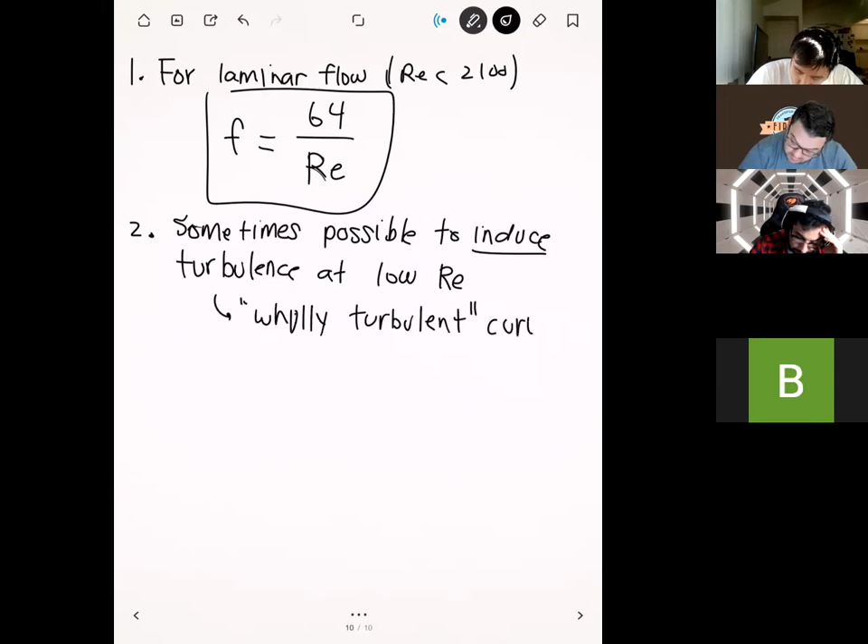So if you look at the Moody chart from the textbook, you should see a curve called wholly turbulent, and that's basically what it means - that's turbulent flow that's been induced or tripped. Okay, and so once that friction factor is found...

Once your friction factor is found, you could use this to compute your major losses. And then once you compute your major losses, you can plug this back into your extended Bernoulli in order to compute pressure drops or anything else.

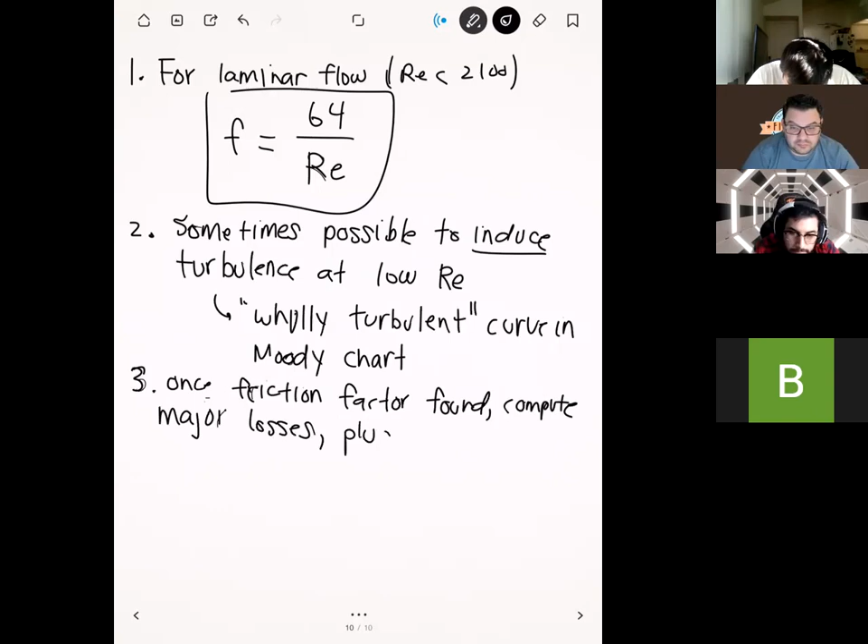In the case where your velocities are going to be the same and your height's going to be the same - so this is purely just for a straight segment of pipe that's horizontal - your velocity terms are going to cancel out, and your height terms are going to cancel out. We have a formula for the pressure drop here.

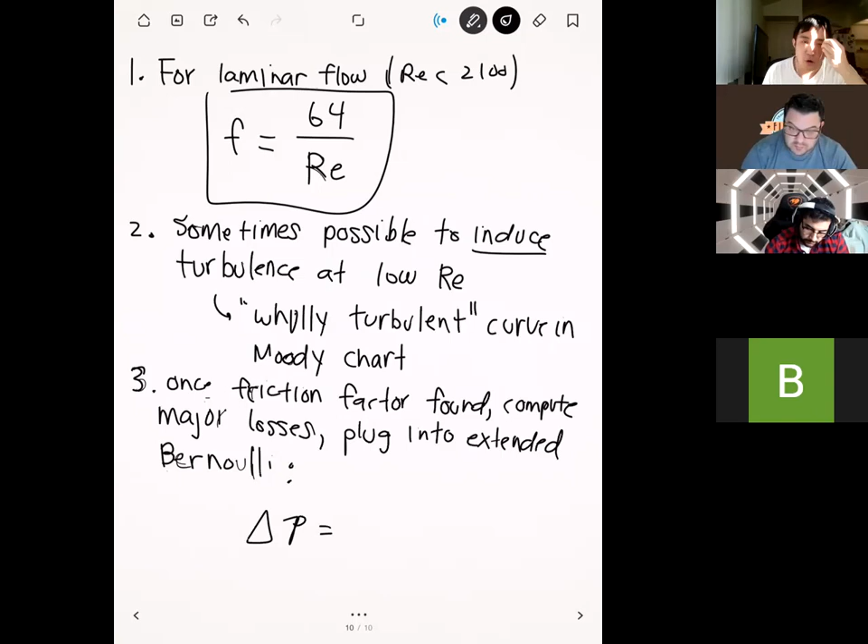So this is a special case. Most of the time, what I want you guys to do is to actually plug this back into extended Bernoulli. But for the cases where all the velocities and the shaft work is 0 and the height difference is 0, you can have a formula for delta P, and delta P is going to be F times L over D, times rho V squared over 2.

So this is a special case. Most of the time I want you to plug into the extended Bernoulli, but even when you do plug into extended Bernoulli, this is what you should get. Okay, any questions on this before we do an example?

You said that this equation was a special case for straight segments of pipe? Yeah, it's for straight segments where there's no height difference. So this is what I basically did - I plugged into extended Bernoulli for you, and then the velocity terms cancel out, and then the height terms cancel out as well. So if you have those cases, you can use this formula, but in my opinion, I think the safer thing is just to plug into extended Bernoulli.

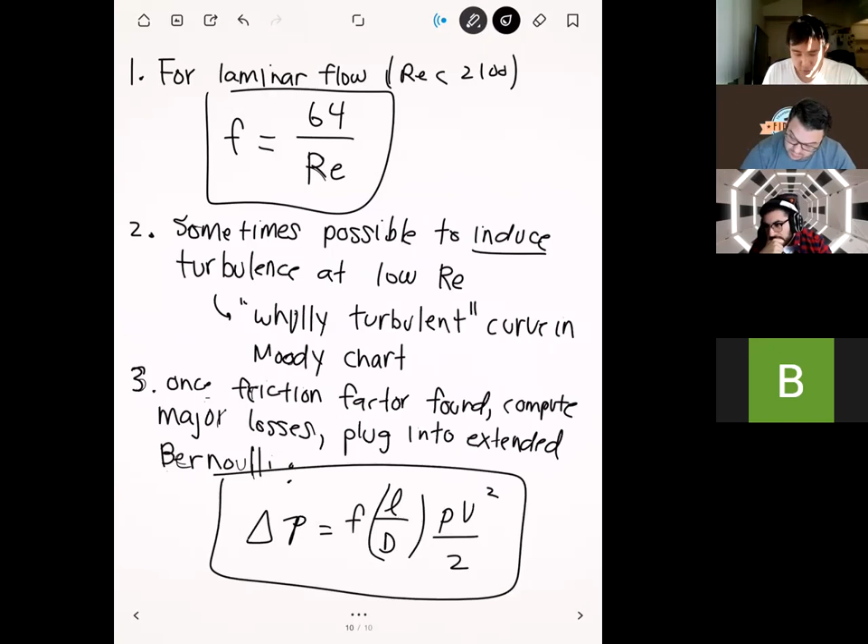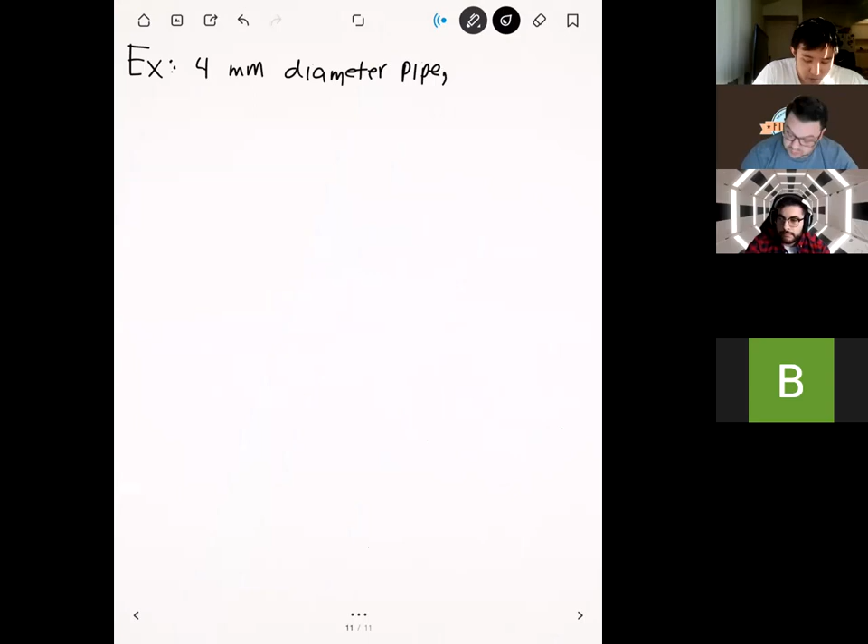Okay, so let's do an example. Let's say that we have a pipe with a diameter of 4 millimeters. And let's say that the material used for the pipe is called drawn tubing, and we're going to use that information to look up its roughness from the table. And let's say that the average velocity in this pipe is going to be 50 meters per second.

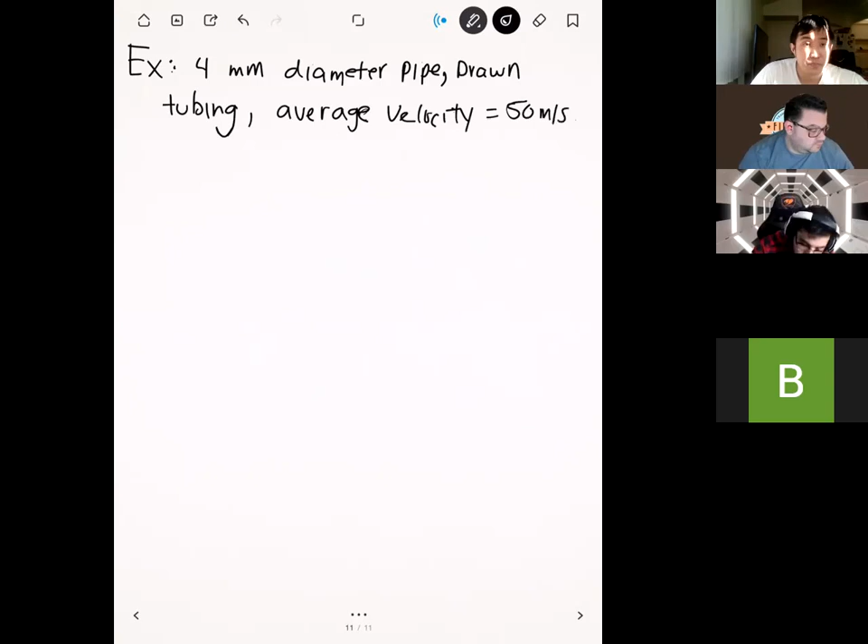Okay, so normally 50 meters per second is actually huge. If you know how long a meter is, multiply that by 50, and the fluid is going to travel that length of 50 meters in 1 second. So this is really fast. What you'll find is when you compute the Reynolds number, it's going to be ginormous. So normally this flow is going to be turbulent.

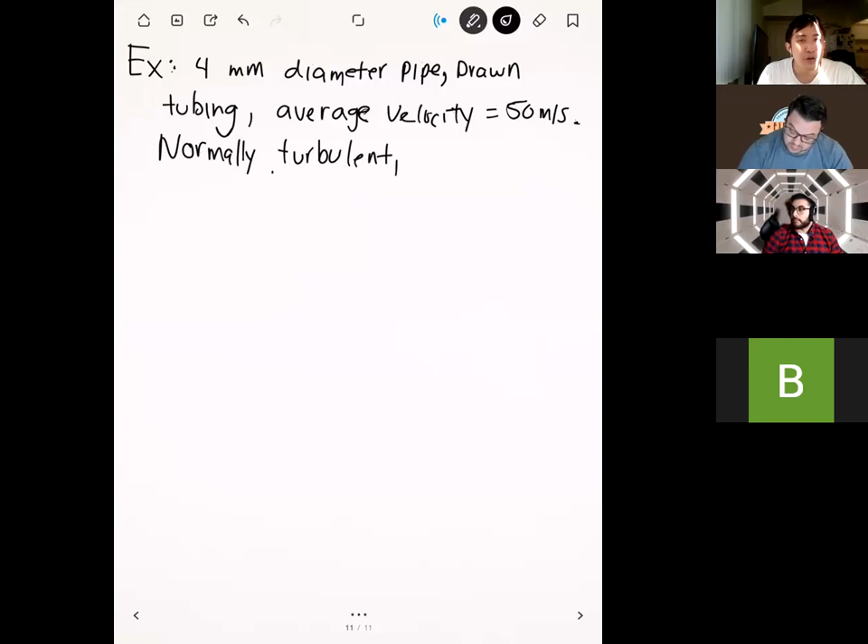But let's just assume, just for this problem, we are really good fluid engineers, and even though we have this really high velocity, we have the ability to keep this flow laminar. I'll just call it magic because there's no other way to describe it. But it's mostly just to show you how to do the calculations with laminar flow.

Remember, laminar is not a characteristic of the speed, but a characteristic of how orderly the streamlines are. So just by some magic, even though we're moving this fast, we're able to keep the streamlines very nice and straight and orderly. And so if our length of tubing is 0.1 meters, let's compute the pressure drop in this pipe.

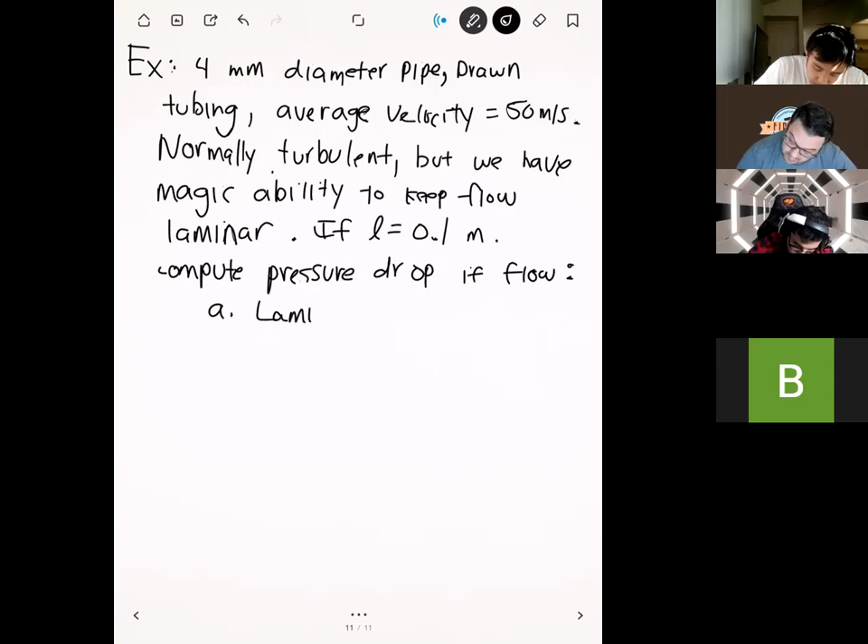Let's compute the pressure drop if the flow - in the first case, we'll take the case where the flow is laminar. And then part B, we'll do the fully turbulent case with the Moody chart.

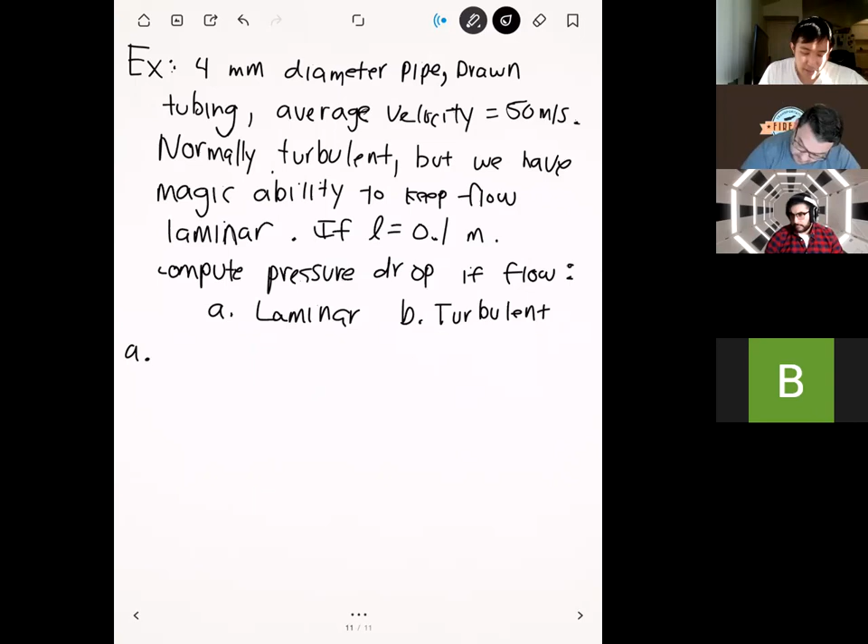We can also assume that there's no height difference in the flow, and that if the diameter is constant, then the velocity is not going to be different. So we're going to use the formula we had up above. All right, so let's do part A. If we go back to the formula on the previous page, in order to compute the pressure drop, we're going to need basically every variable in this expression.

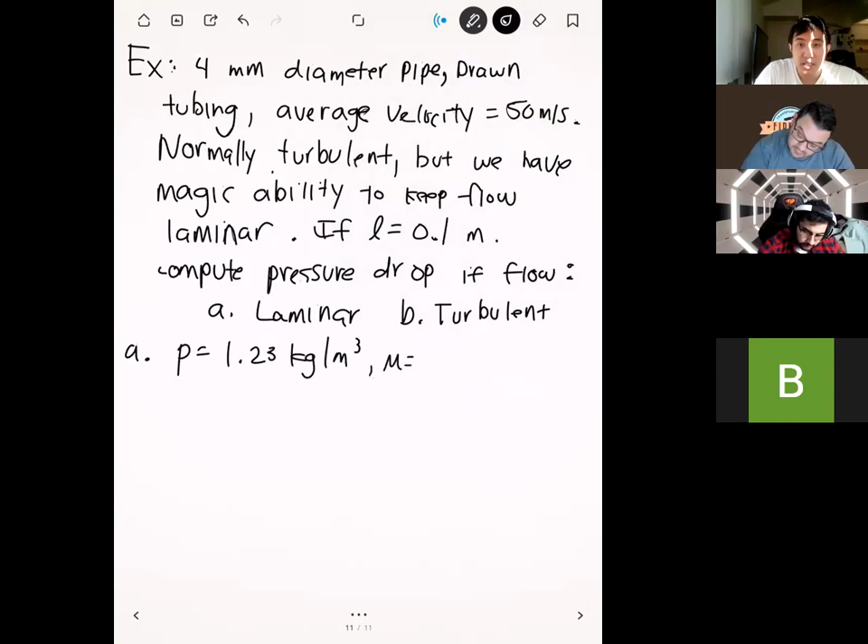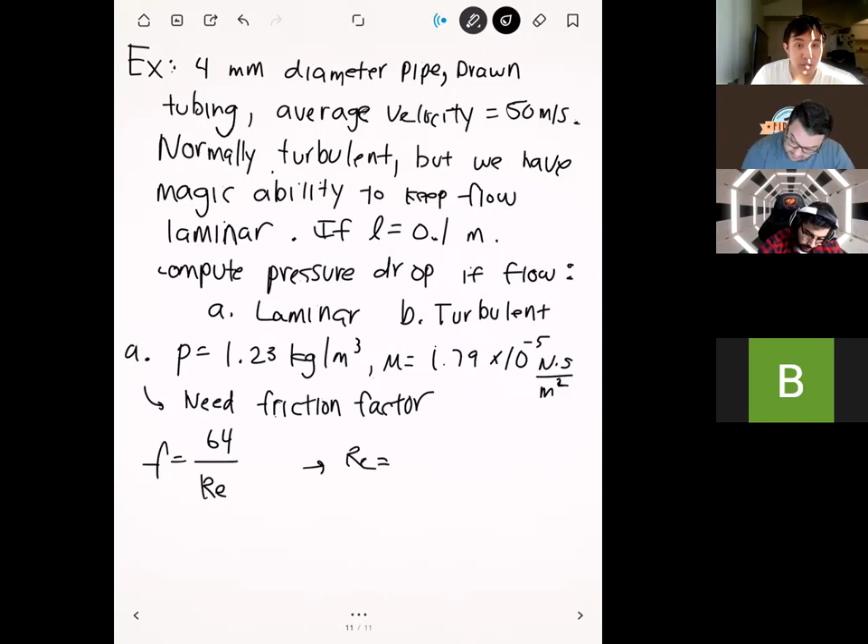And so the last thing that we need here is the friction factor. In part A, since we're assuming that the flow is laminar, we can use the following formula for friction factor. For laminar flow, the friction factor is just going to be 64 divided by the Reynolds number. So in order to do this, we need the Reynolds number, which is going to be rho V D over mu.

And so we plug all the numbers in, and we find that our Reynolds number is 13,700. And so if we plug that back in, what we get is a friction factor of 0.00467.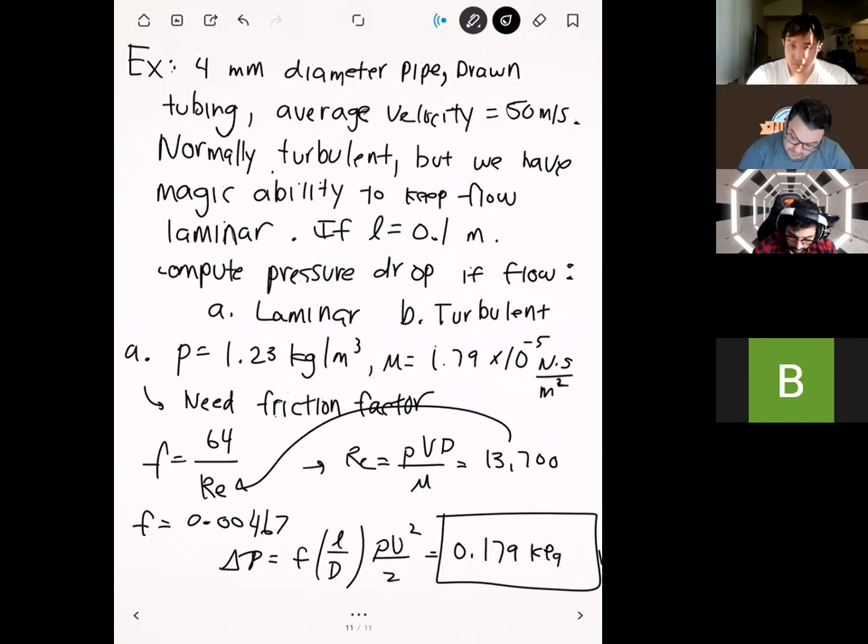Okay, and so now that we have the friction factor, we can go ahead and compute the pressure drop. Our pressure drop is going to be F times L over D times rho V squared over 2. And so we plug in all the numbers, and what we get is a pressure drop of 0.179 kPa. As the flow goes through this pipe, and by magic we can keep the flow laminar, our pressure is going to drop by 0.179 kilopascals. Any questions on this part here?

Okay, and so that's the conditions for laminar flow. So laminar flow is pretty straightforward - you just use that formula to compute the friction factor. But if your flow is going to be turbulent, we have to use the Moody chart.

Quick question - is the friction factor a unitless term? Yes, it has no units. Okay, thank you.

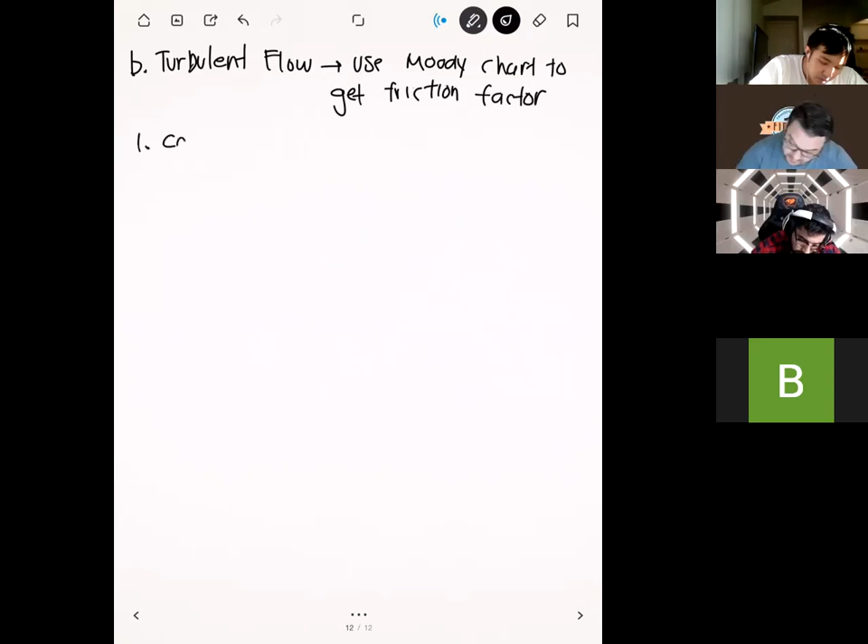Okay, and so for turbulent flow, we have to obtain the friction factor from the Moody chart. We're basically going to follow the same recipe that we talked about before, and so the first step for that recipe is to compute the Reynolds number, which we did in the previous part. So we know the Reynolds number is going to be 13,700.

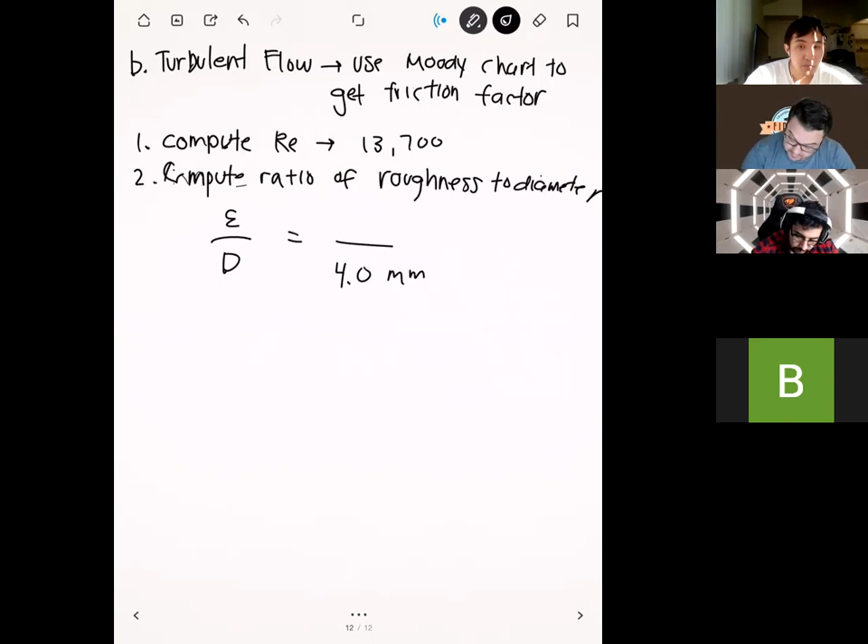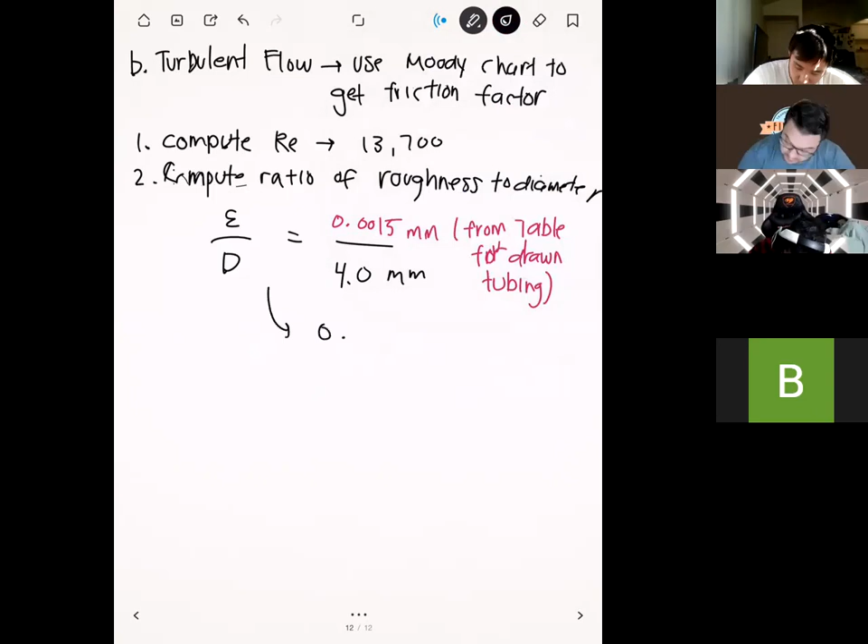Step 2, we need to compute the ratio of the roughness over the diameter - that's going to be epsilon over D. We know D from the problem, so D is 4 millimeters. At this point we need epsilon. If you look up the table in the book for drawn tubing, we see that epsilon is going to be 0.0015 millimeters - this is from the table for drawn tubing. And then once we compute this ratio, we see that this is going to be equal to 0.000375.

Okay, and so at this point, since you know the ratio of epsilon over D, you can use this and search for that value on the Moody chart. And what you'll find is that there's actually no curve for 0.000375, but there is a curve for 0.0004, and so this is close enough. A lot of times when you're doing these problems, you're not going to find a Moody chart curve that exactly matches your epsilon over D, so you're just going to have to pick the one that's closest to it.

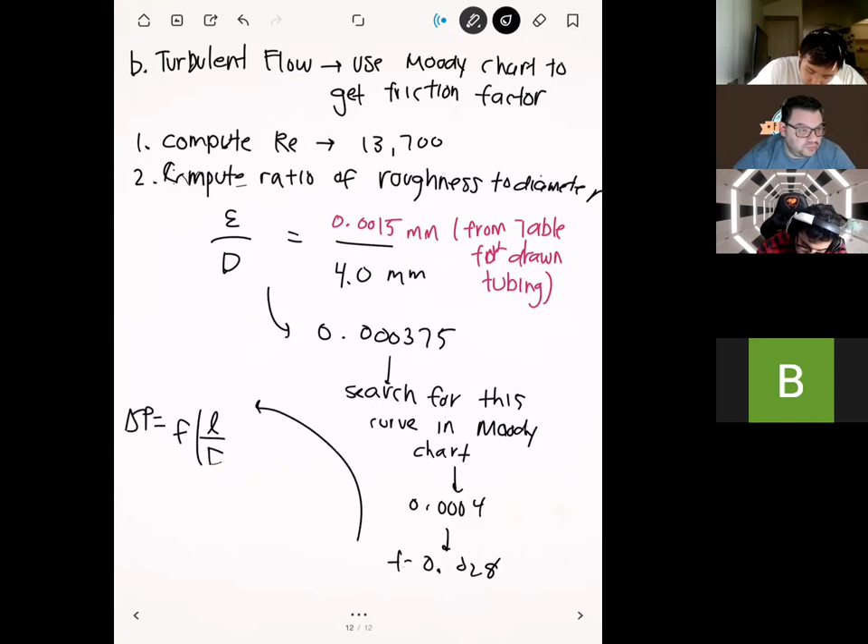And so for this, if we look up on the Moody chart for this Reynolds number, what we get is a friction factor of 0.028. And so if we use this friction factor to compute pressure drop - pressure drop is going to be the same formula as before, so we have friction factor times L over D times rho V squared over 2 - what we get from this is 1.076 kPa.

And so what you can see from this is that if you have turbulent flow, and we compare this to our answer in part A, we only got basically 0.18 kilopascals of pressure drop. And we compare that to our answer in part B, which is 1.076.

You can see that turbulent flow has a much bigger pressure drop. So basically to flow fluid down the same length of tubing, at the same speed, turbulence is going to take over 5 times as much energy, almost 6 times as much, to basically drive the same flow. So you can see turbulence is very inefficient.

Because you have all that random motion, basically what's happening is that fluid is colliding with the pipe walls all the time. And because of that, you have a lot more energy losses than you do in laminar flow, where everyone just kind of flows down their own path.

Okay. Any questions on this example here?

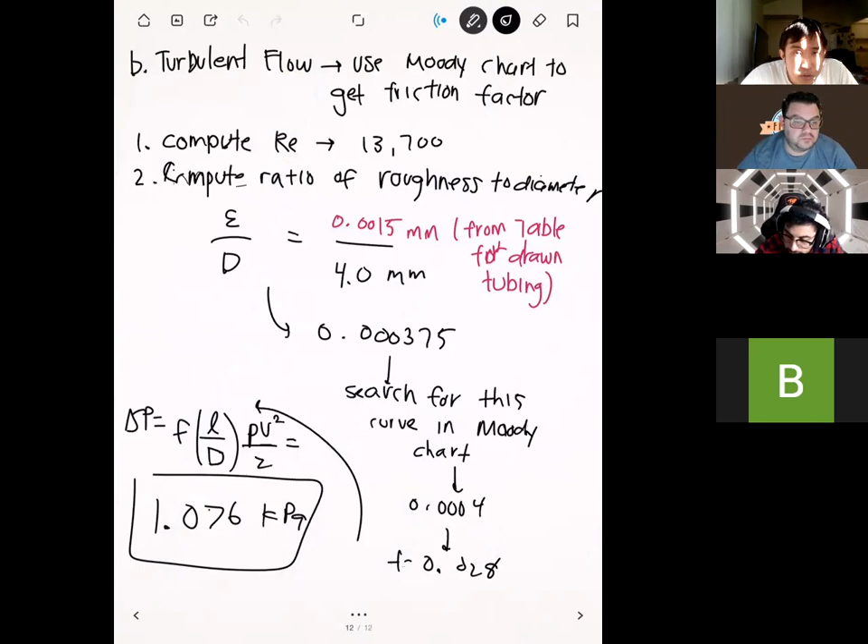The question in the chat is, what is that table for drawn tubing? I wrote it down earlier in the notes, let me find it again. I think it's table 8.1. Yeah, table 8.1. If you look up table 8.1 in the textbook, that's going to show you the surface roughness for different pipes.

Okay. Any more questions on this example here?

Okay, so that's major losses. For major losses, first thing, you always have to compute the Reynolds number, that's always important. Then depending on if you're laminar or turbulent, that's going to give you different formulas for your friction factor. With that, you should be able to do the homework problem now, so that gives you enough to do problem 4.

Since we have a little bit more time left today, I do want to introduce the concepts for minor losses.

Remember, minor losses characterize the energy losses through basically every other pipe component that's not straight.

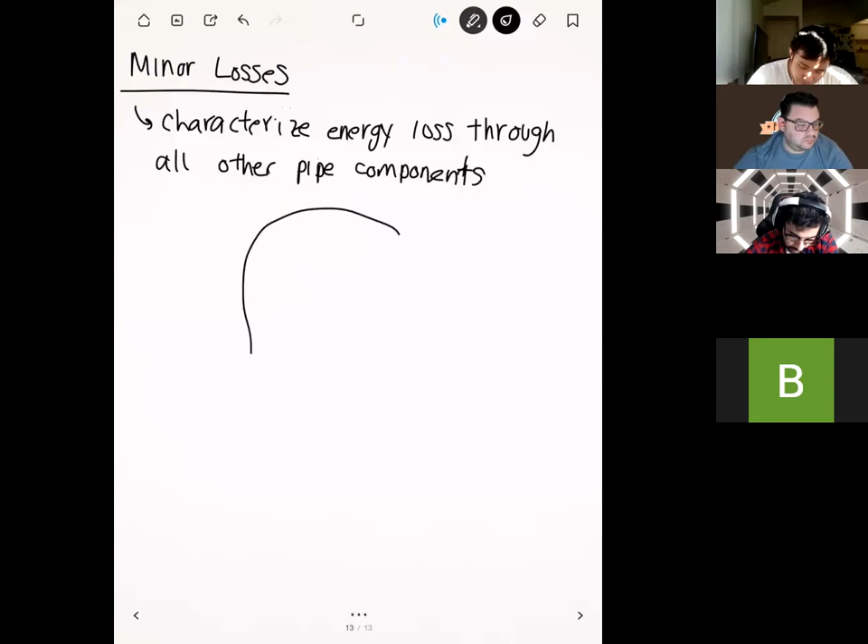Let's say if you have fluid coming in, as it comes in, it kind of has to run into this wall and realize there's a wall, and then after that, it's going to curve into these directions. Because we have that kind of collision with the wall, there's going to be some losses that occur, because the flow here is a little bit chaotic, even for the most laminar flow. So because the flow has to change direction, that's going to incur some losses. Okay. And so just like major losses, we're going to compute things in terms of heads.

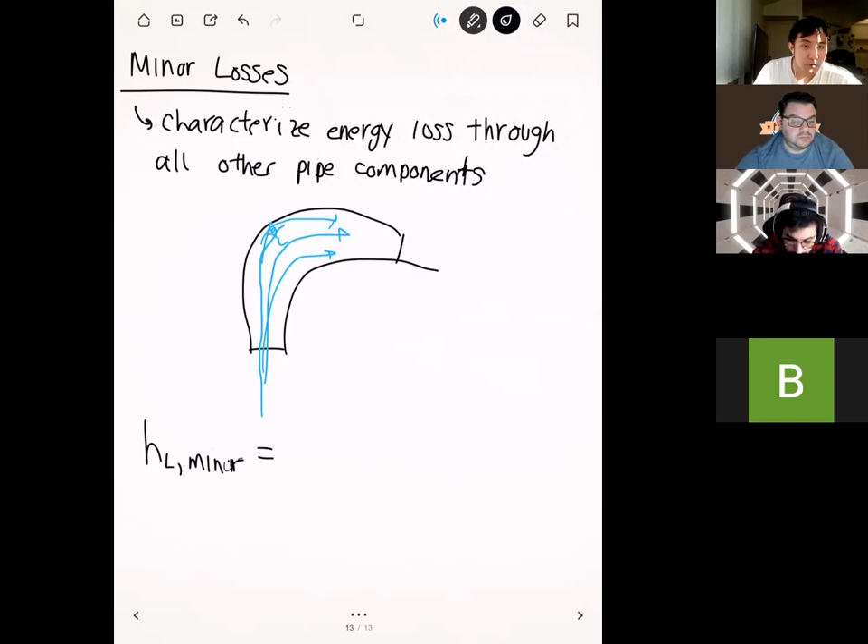And so the formula for minor losses, where the major losses had their friction factor, minor losses have these things called the loss coefficient. It's going to be K sub L times V squared over 2G. Where this guy right here, this is our loss coefficient.

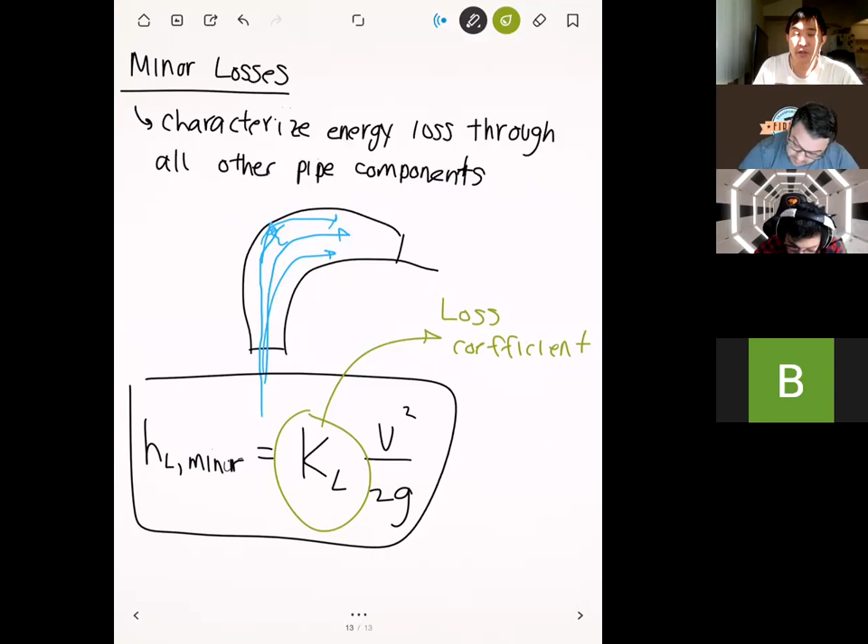The loss coefficient is going to depend on what type of device that you're going to be looking at. We'll get into that next time because we're out of time for today. But what we'll see next time is, based on what type of component you have, you can compute the minor losses based on this. Okay, so that's all we got time for.